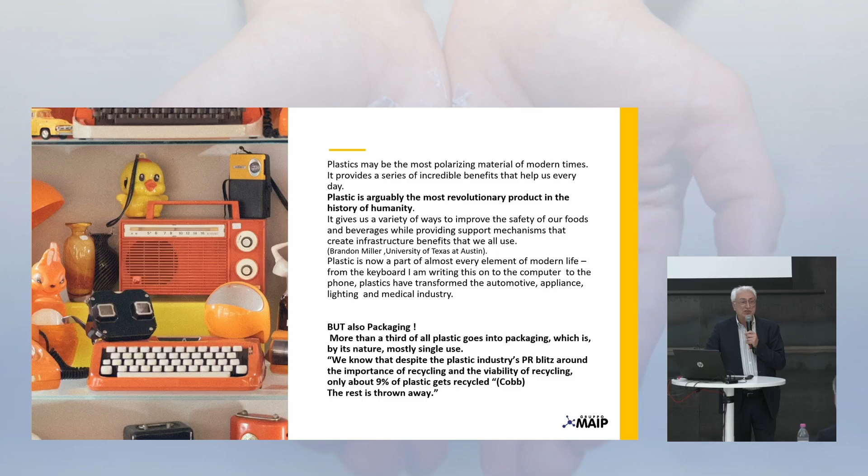Of course, we can recycle plastic, and Europe, and Italy especially, is very advanced in the recycling system. But for instance, in the US, only 9%, maximum 10% is recycled. The rest is going to landfill, creating pollution in a very huge area. Which is the problem of plastic? The durability. One of the most important advantages of plastic is that it's not easily destroyed. It's a durable material. This is a big advantage. It's not like metal that can be corroded.

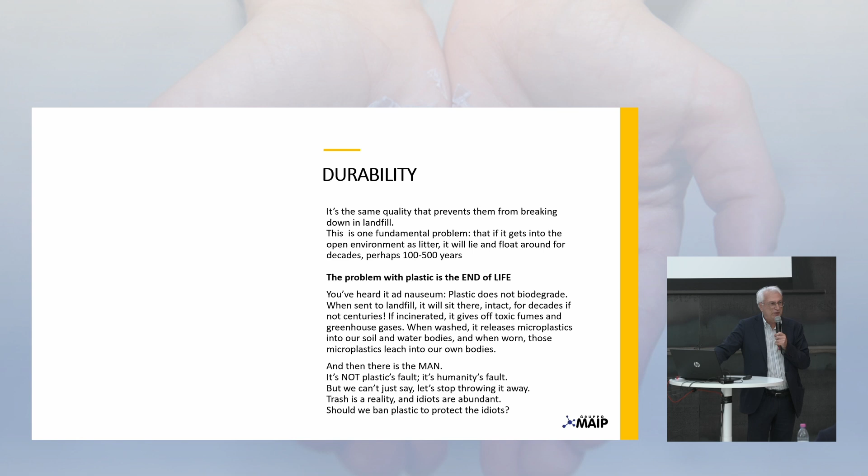But this advantage is also the problem at the end of life. We have a lot of problems, I repeat, with the end of life. So every day you have something against plastic. Plastic is not able to degrade. When sent to landfill, it creates a lot of pollution, and so on. And then there is also man. Man sometimes is an idiot, because many people throw away plastic components. So you find plastic littering on the beach, in the sea, everywhere. And this is really a problem, the littering.

But you have to imagine one point that is very important. If we decide to replace plastic with another material, in any case, we will do some hostile act against nature. Because, only to give you an example, the CO2 emissions would become 2.7 times more. It's an official number. So plastic is still an ecological material. But of course, we can't forget what we see every day. These are some pictures from the world. Plastic pollution everywhere, mostly in the sea, in the marine environment. This is the real situation.

Maybe everybody knows the problem of the plastic islands, the plastic gyres. But you have to imagine that the plastic that you see, an island more or less similar in extension to France, another island similar to Greenland, and so on, is only 1% of the plastic in the marine environment. 1%. There is 5% more on the beaches. But what is unbelievable, but is the reality, 94% is at the depth of the sea or in the ocean itself.

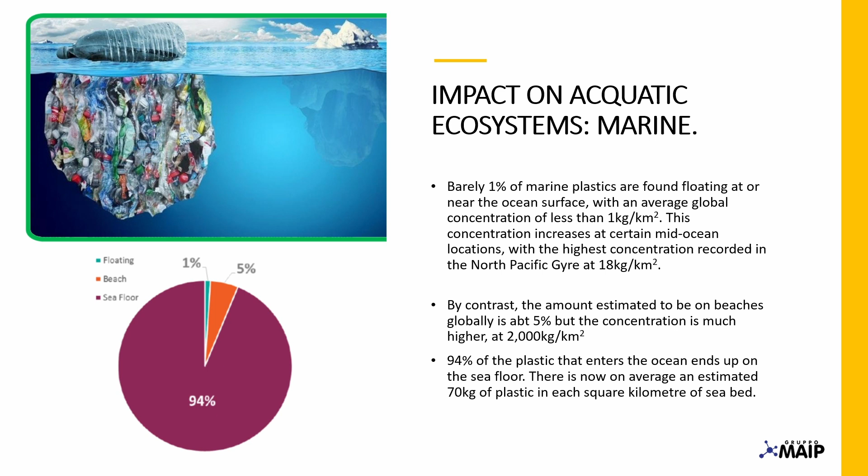I have not put a slide here, but imagine that some researchers of Newcastle University discovered last year a new type of shrimp, never discovered before, at a depth of 6,000 meters. The new shrimp was called Eurythenes plasticus. Why? Because in the stomach, the researchers found a piece of PET. The feedstock of the shrimp was PET. Imagine, at 6,000 meters.

Why? Because we have a lot of microplastic. We have primary and secondary microplastic. We have microplastic and also nanoplastic, which are more dangerous than microplastic. And all this type of material, sooner or later, is arriving to humans. You see the new food chain: plastic, the bottle, shrimps or birds, and at the end we eat plastic, microplastic. Which is true, but not everything is true. Now I give you an idea about some fake news that is coming on microplastic.

WWF, a famous world organization for animals, said some years ago that each person is eating every week an amount of microplastic equal to a credit card. So 5 grams per week, terrible. Imagine, everybody, you are eating 5 grams per week. And every kind of newspaper and magazine reported this news. So for everybody, we are eating a credit card every week. But it's not true. It's not true.

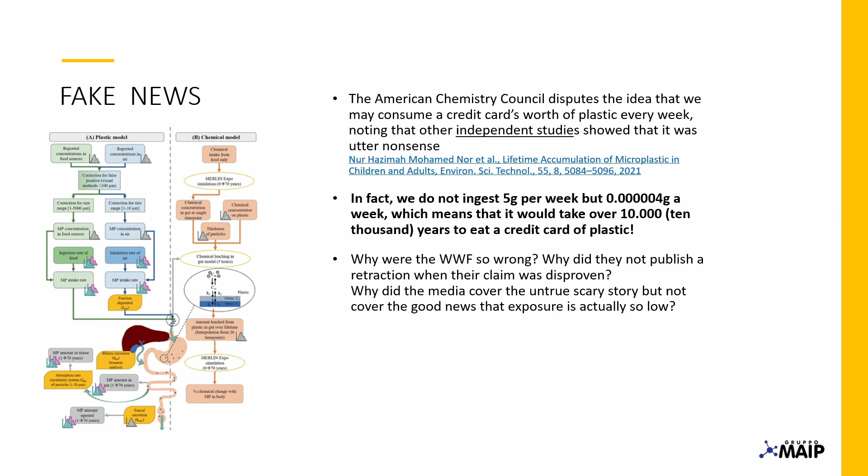Why? Money. The reason is money. Newspapers are able to sell more if the news are negative, not positive. And also the NGO or environmentalist organizations can receive money if the news are terrible, not if they are positive. Say no to plastic, ocean is full of plastic, and so on.

Do you want to see another fake news? Straw. It was reported by many magazines, Washington Post, National Geographic, Fox, everything, that in the US we are using 500 million single-use plastic straws per day. 500 million, imagine the number.

Terrible, terrible. So what is the reaction? We have to avoid the use of plastic straws. But where does this news come from? What has been the study behind this news? Now I give you the answer.

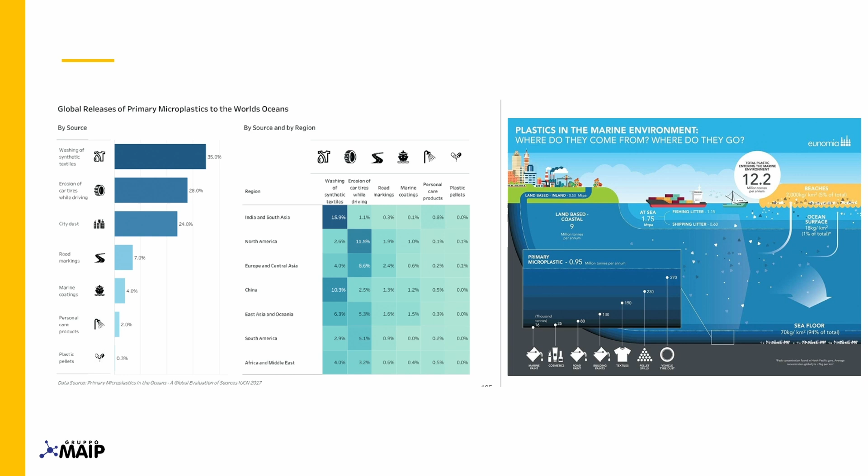We are speaking about a lot of microplastic. Imagine that every year in the sea, about 12 million tons of plastic arrive. Of this, about 1 million ton is primary microplastic, meaning intentionally added microplastic.

And one of the most terrible problems is the washing of polyester textile. Normal washing machines are not able to make good filtration for this. So it's normal to say that it's better to use a natural material, for instance cotton. Cotton is natural, it's not like plastic.

But we have always to give a complex view of everything. So the question could be, what is more friendly between cotton and polyester?

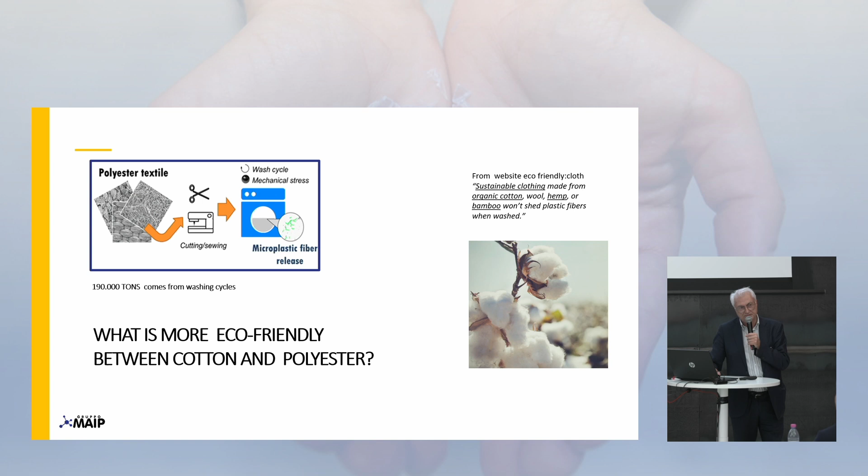I have to tell you one point more. What is the most important resource for our period? Water. We need water, and the ecosystem of water is collapsing. This year, I was on vacation in Uzbekistan, and personally I saw what is happening in the Aral Lake. There is no water. The biggest lake in the world is now without water. The boats are on the land, no water.

Turkey was a country with a lot of water in the past. Now they are starting to need to find water. And what is happening? A geopolitical war. Do you know where there is still some water? In Kurdistan. This is the real reason Turkey is trying to take a lot of land from Kurdistan - for water, not for petrol, for water.

So water is precious. And I come back now to the question, polyester or cotton? To produce 1 kilo of polyester, you need 20 liters of water. If you need to produce 1 kilo of cotton, you need 11,000 liters of water - 550 times more. You need a lot of water. You are destroying the country if you take the water for producing cotton in a natural way.

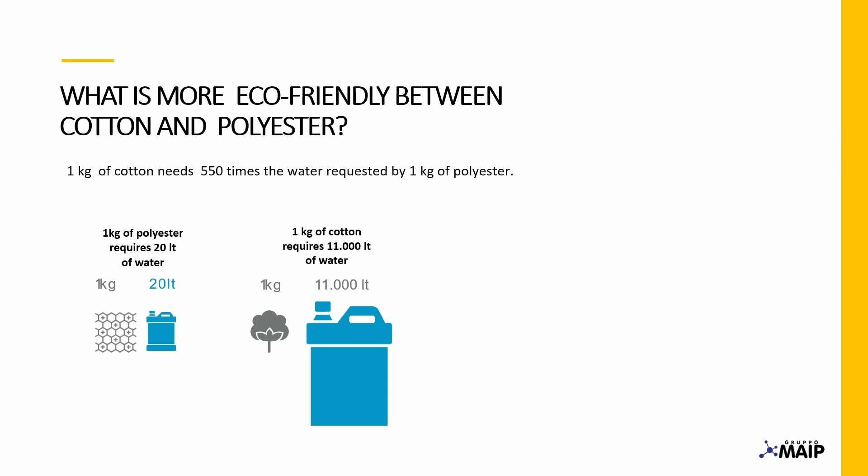If you take a cotton t-shirt, to produce one single t-shirt you need 2,700 liters of water. So be careful to say that cotton is better than polyester.

Another fake, Greenpeace, very famous. Greenpeace, to tell the truth, lost a lot of its credibility because the founder of Greenpeace said, despite my best effort, the movement abandoned science and logic somewhere in the past. Now it's not scientific at all.

They published a book, Biodegradable Plastic on the Sea. In the book was written that bioplastic does not degrade in marine water. Officially. Again, this is fake news. It is not true. At least there is one material, one biopolymer, that is able to degrade in the water.

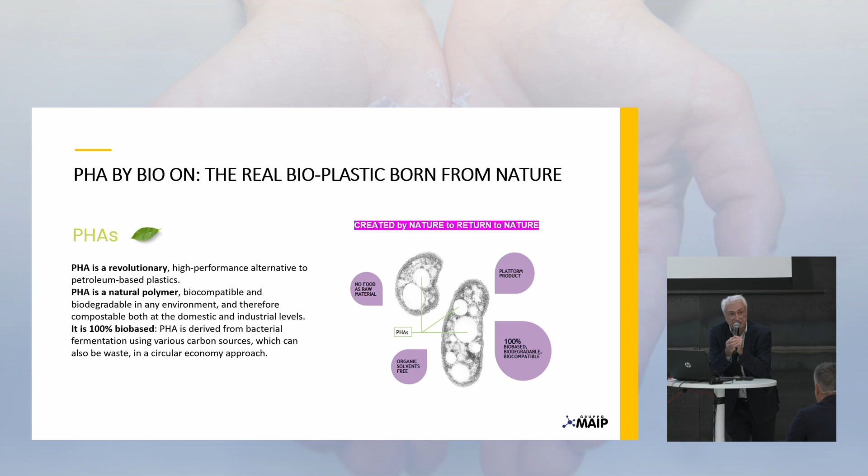It is biodegradable in any ambient, in any environment. And this is written by something that is studied by nova-Institute in Germany.

But of course, we face microplastic of any kind, also in agriculture, you see some parts. But we can produce this part now in PHA. A PHA, if it falls down on the land, becomes a fertilizer. It doesn't become a microplastic. It becomes a fertilizer.

So, plastic is not a devil. It's really a big invention, an important invention of mankind.

But check the news with a scientific approach. Not everything is true.

PHA is an angel that could save a problem. Where is my conflict of interest? I am half devil and half angel. So interiorly, I have a big conflict of interest. But at the end, what is my dream? My dream is to combine nature and future. Thanks for your attention.

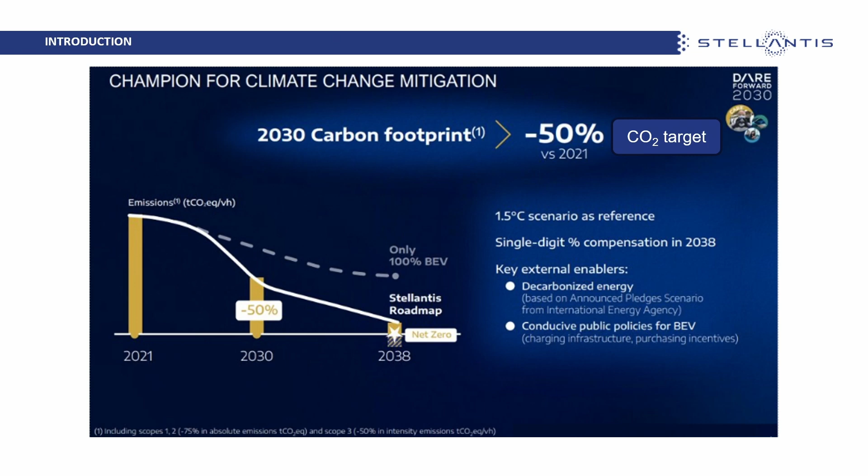And, okay, thank you. What is interesting in the graph on the slide is that there is a dotted line. The dotted line represents the path we will have if we only electrify our cars. You can clearly see that it will not be enough to decrease our CO2 emissions and meet our targets.

This means that we'll have to work not only on electrification, but also on the materials and processes used to realize the components used in our vehicles.

So this is the other main target I mentioned before - more a constraint. This is the draft of the end-of-life regulation. At the moment it's under discussion, but currently you can read that in the future, probably 2041-2042, we will have a target of 25% of the plastic in our vehicles being recycled and post-consumer recycled. And 25% of that 25% should come from end of life.

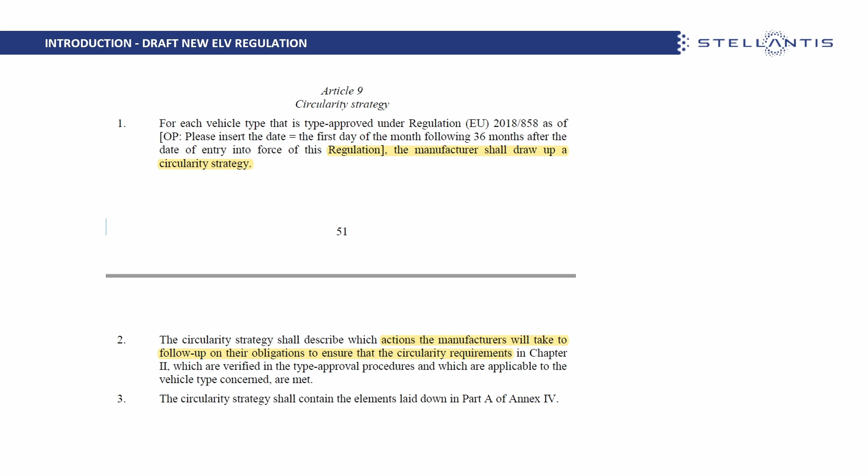Okay, so it's a huge constraint. Associated with this, there is also an indication that it will be necessary to create a circularity strategy, and I will come back to this later. There is also a list of parts that will need to be dismounted from vehicles at the end of life. This is also impacting, because if you look at the list, there are for example the dashboards, which are not so easy to dismount because they are inside the vehicle compartment.

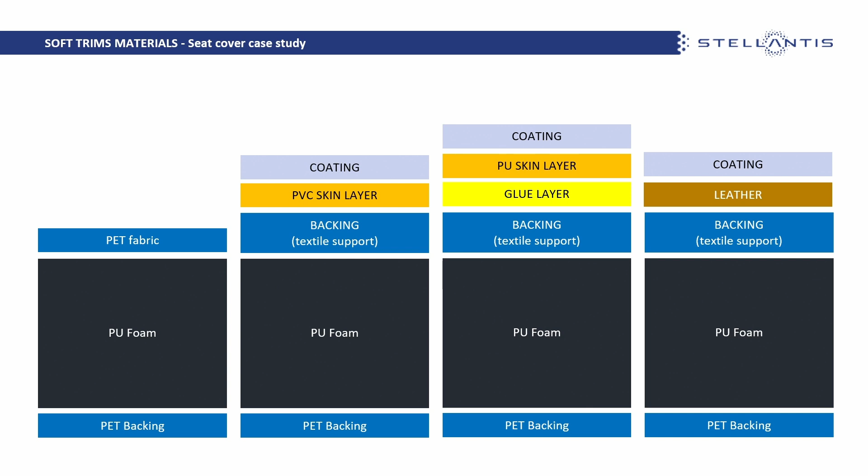We can see this clearly looking at this other slide related to the structure of the material used for seat covers. In this case we have four examples: the first related mainly to fabrics structure, then we have the PVC structure for seat covers, another structure using a polyurethane coating or skin, and leather. In all four cases, we have a polyurethane foam and a backing made of polyester.

Also in this case, we can see that the structures are very heterogeneous. If I have to recycle this kind of material, it will be quite impossible. So the main way to reuse them will be to burn them to obtain energy.

What can we do? One possible approach that not only us but also our competitors are looking for is the monomaterial approach—to substitute the layer, in the example here the polyurethane layer that is between the two polyester layers, with a non-woven polyester.

In this way, we will have the aesthetic layer made of polyester, the layer in between—that was before a polyurethane foam—made of non-woven polyester, and the backing made again of polyester. This, from the point of view of recyclability, is a very good option.

From the point of view of a designer, it's a constraint, because this will mean the possibility to change and propose to the customer something different is limited. For example, if we look at Stellantis, we have 15 brands now, so to change from one brand to another will be really difficult.

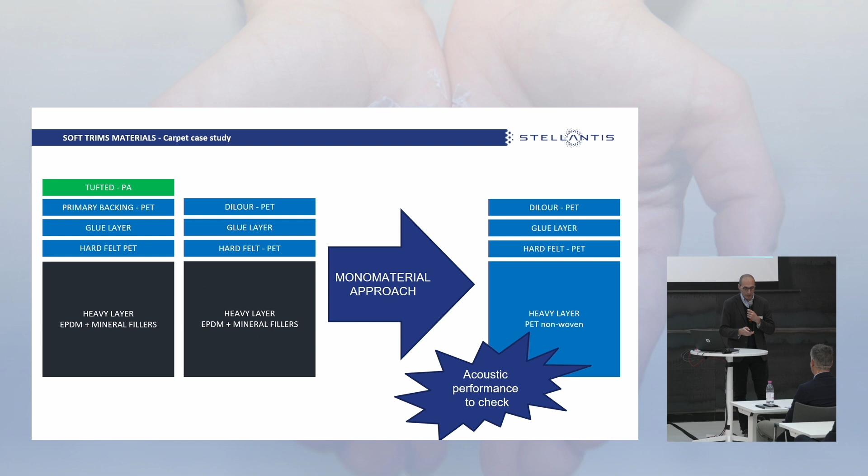So, jumping to the plastic world, first of all I would like to say a few words about our new approach with the creation of Stellantis. We defined some new codes to codify the plastic materials.

These codes are called GPC, the Global Plastic Callout, a system of codes. To this code are associated specific chemical, mechanical, and physical properties, and to each of these codes we associate several commercial materials. In the example you can see here, we have a code associated to a thermoplastic olefin. You can see that in the code we have the indication of the filler, the quantity of the filler, and some mechanical performances associated to that specific code.

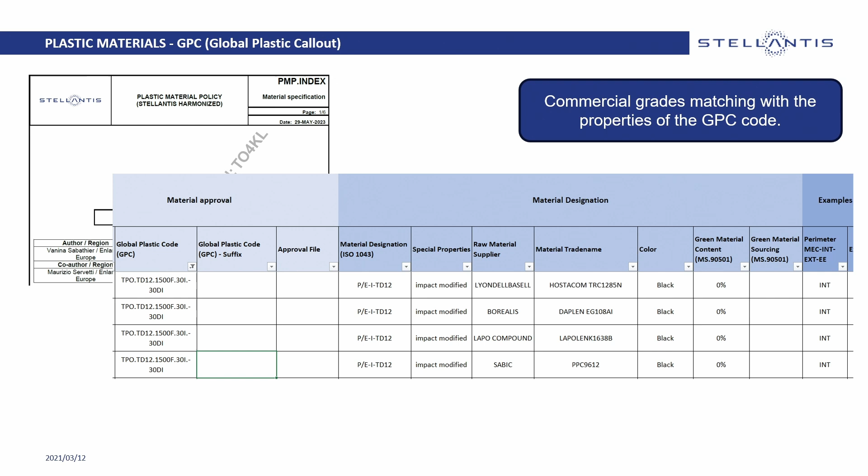So the chemical, physical, and mechanical properties that we will have to fulfill to codify a commercial grade with the code we saw before. The last document associated to this new policy is the PMP index, a standard with inside the list of all the commercial grades approved in the Stellantis world, to which the GPC codes are associated.

Moving to the green strategy, the main focus of Stellantis currently is mechanical recycling, because at the moment it's the most diffused and also the cheapest technology available. The other possibility we are evaluating, but not yet implementing much, is biofeedstock and chemical recycling, to which is associated the mass balance approach.

These kinds of materials are not so used for several reasons. For sure we have the cost. Another reason is that this mass balance approach is not so well seen, also because the regulation currently is not well detailing whether it will be accepted or not. For example, in evaluating the 25% end-of-life regulation we will be obliged to respect in the future, the hope is that the regulation will evolve so it will be possible to understand well if this kind of technology can be used to reach the target the European Commission will give us.

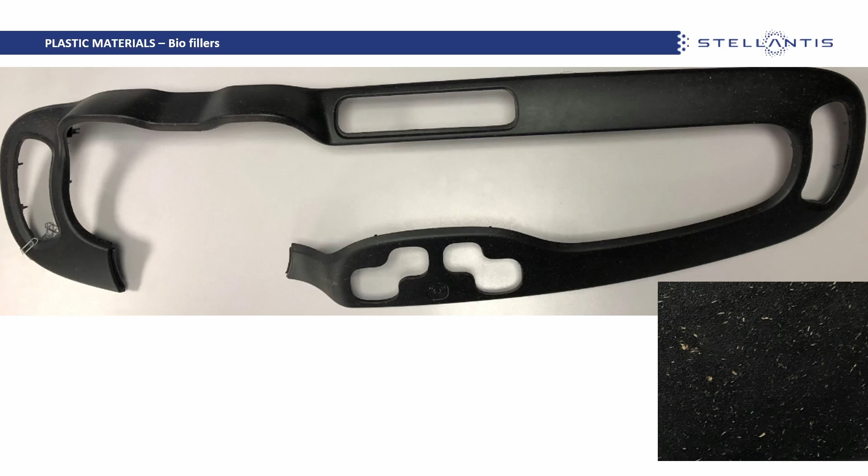Then we have an example that we made with MIPE, who is here with us today. This is another potential approach to sustainability in plastic, the application of biofiller inside the plastic. In this case, we have the application of wood fibers. This is an instrument panel fascia that has been used in a Panda model. A specific event was dedicated to this model, and I can say it has not been the only activity we did with biofiller, but I want to explain the way we currently see this filler.

From the point of view of CO2 emissions, the results are very good. From the point of view of mechanical properties, we saw performances decreasing, so not at the level of the standard filler. From the point of view of processability, they bring some constraints, because we have to decrease, for example, the temperature of extrusion. From the point of view of chemical resistance and aging, we have the same properties as the standard technology. So we are interested, and we are using them as I showed you in the example, but obviously we cannot use them everywhere, okay?

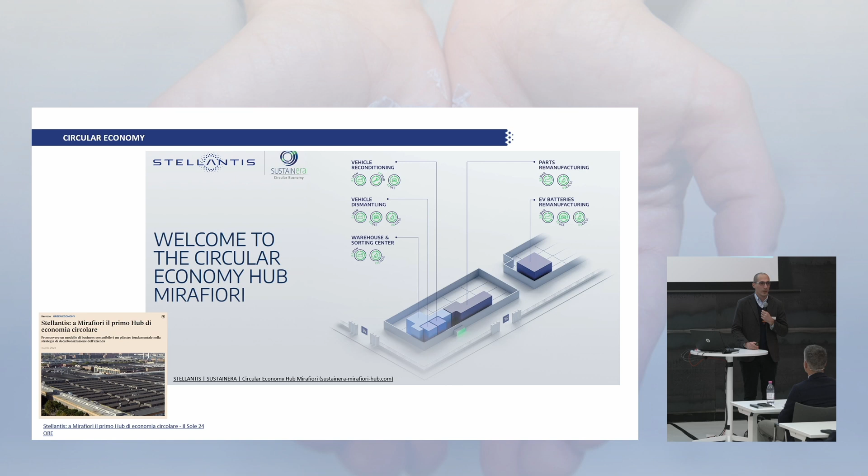And the last ongoing activity is the remanufacturing of end-of-life batteries. Obviously, in this case, the numbers are not so huge. Now I will show you a short video about the Mirafiori Hub.

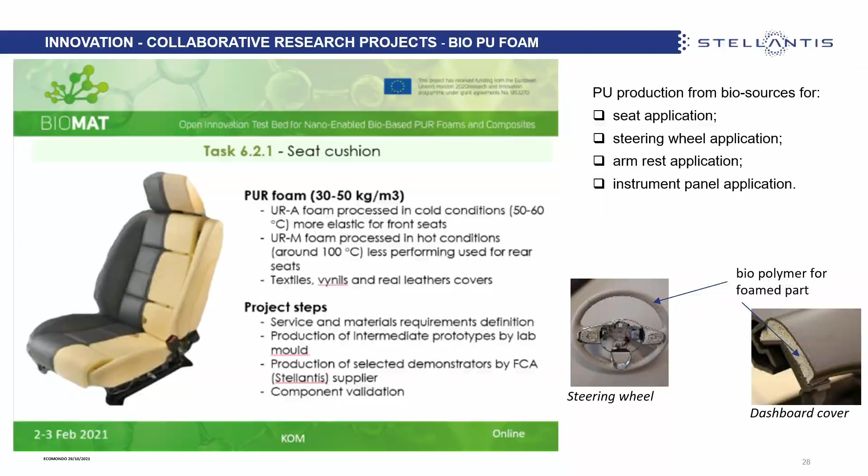We are also working on a polyurethane biofoam, in a project called Biomat. In this case, we would like to develop a polyurethane foam for seat cushioning application and the steering wheel. We have another collaborative project called MyFi, which aims to develop a skin based on fungal fermentation, with the goal of substituting leather for interior applications.

We have another project called Life Green Vulcan, which focuses on recycling tires at the end of life with a specific devulcanization process. And another project called Viable, whose scope is to try to use lignin as an alternative to bisphenol A in epoxy resin.

Then we have Eolo Hubs, in which we would like to recycle material coming from turbine blades at the end of their life. And then the last one I will touch is Like Beyond, in which we are working on several activities to make our vehicles more green.

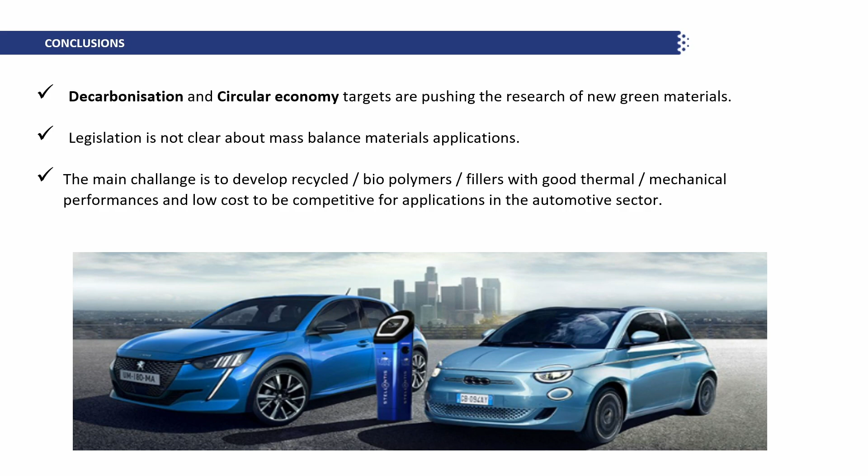So I'm going to the conclusion. As I say, decarbonization and the circular economy are pushing us to research new green materials. We would like to have also legislation more clear on which kind of technology are allowed. And as you can imagine, we have to develop recycled biopolymers and fillers with good performances, but it should also be at an acceptable cost, if possible at a low cost, because as you know, the automotive sector is very, very competitive, especially in this period.

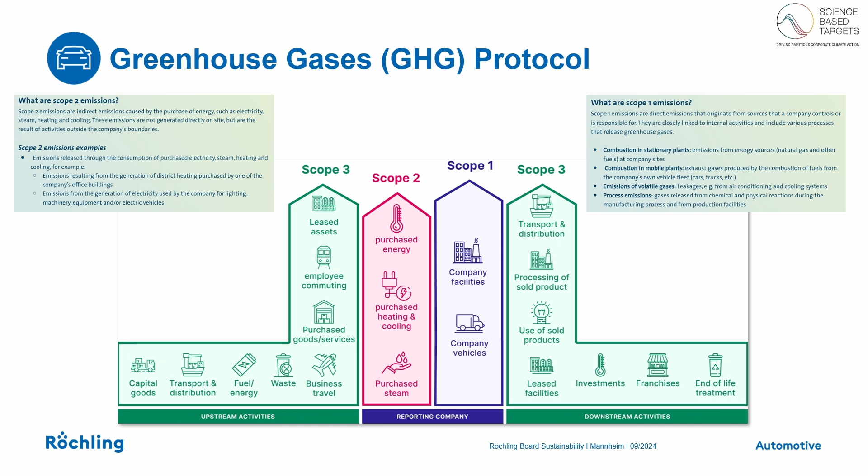Product, people, planet: these are some of our KPIs that I was following. As I said, 2030, 80%, following the SBTi program, so science-based targets, and 100%, so net zero in 2040, for scope 1 and scope 2. As you can see, scope 1 and 2 and scope 3. Scope 3 is something that we cannot directly control because we have upstream and downstream activities. But for scope 1 and 2, as Röchling, we can proceed with our activities and with our projects.

Today we will talk about products and plastic. In Röchling we started 10 years ago to talk about biomaterial and recycled material. We have two families of material group. One of these is Reloop, so all the material starting from recycled solution, either post-industrial or post-consumer.

Today, in 2024, our global production uses 30% of recycled material. In some cases, we have some components totally made in 100% recycled solution. And our goal in 2028 is to achieve 60% overall of our production with recycled material when and where customers require this. And now it's a pleasure to hand over to you, Francesco, to explain the LCA process.

So, as introduced by Andrea before, I'm the one in Röchling currently leading the LCA project. So I will give you a short introduction of what this project means. In general, according to our strategy, we want to evaluate the environmental impact of our products in order to reduce it. But before reducing, we have to evaluate. The methodology we decided to use to evaluate the environmental impact is the life cycle assessment.

As many of you probably know, the life cycle assessment is a methodology that allows us to evaluate the environmental impact through the whole product life cycle, so from raw material extraction to the end of life and disposal. So we, as Röchling, want to start evaluating our products. It's a project that we started almost 2 years ago. And the target we had at the beginning is a part of the life cycle.

It means we want to evaluate at first the carbon footprint, the GWP. This will be the first step we take, and afterwards, step by step, we will move to an evaluation of all the other impact categories. The GWP actually means that we measure the heat absorbed by the greenhouse gases as a multiple of the heat absorbed by carbon dioxide.

As said before by Alessandro, we are a global company, so we have to think globally and have a global approach. That's why we decided to create a general model. Why? Because our facilities work more or less in the same way. We produce the same type of parts, so we can produce with the same approach. That means especially a primary manufacturing and then some subsequent operations. In this primary manufacturing, we use raw material, and then we may or may not mount subcomponents, outsourced parts, on our products. That's why we decided to identify the boundary of our analysis.

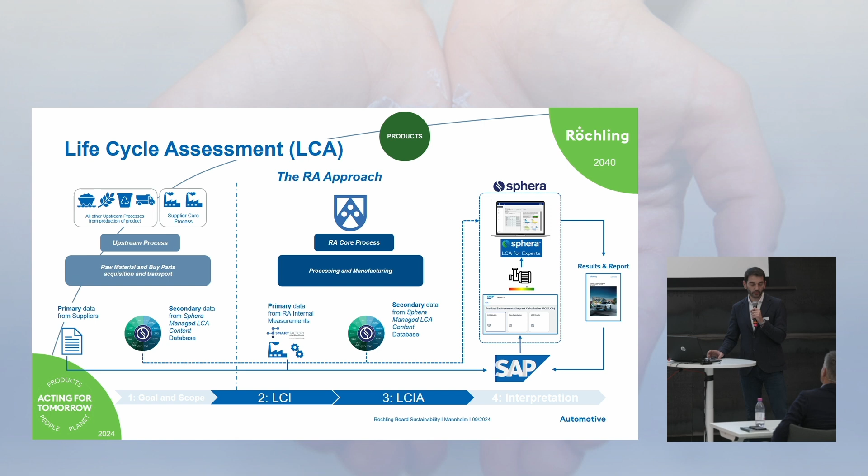Hello. Thank you, Francesco. My name is Matteo Traina, and the last part will be dedicated to what is one of the key pillars of our company, meaning that we are plastic guys. We develop product, meaning that the very first thing that we know we need to manage is to be aware about the material we use.

In particular, if we try to pursue solutions to get sustainability, it is also to select the right material. This applies in the specific case to know exactly what is available on the market in terms of solutions to get sustainability. I think recycled material is the very first thing that you can have in mind. But since we are all people working on plastic, we are conscious that there are also other solutions.

With these solutions in mind, the very important thing is also to understand that each solution has a different feature. Unfortunately, none of these is the perfect solution which is able to put everything together: low cost, high performance, high sustainability footprint. Any of the solutions that we have on the market is affected by some drawback.

If you don't mind spending, you have the perfect solution because you have the biofeedstock-based material using mass balance. On the other side, it means that everything is costing more. If you have recycling, you don't have the perfect technical solution because you are suffering some reduction of the performance.

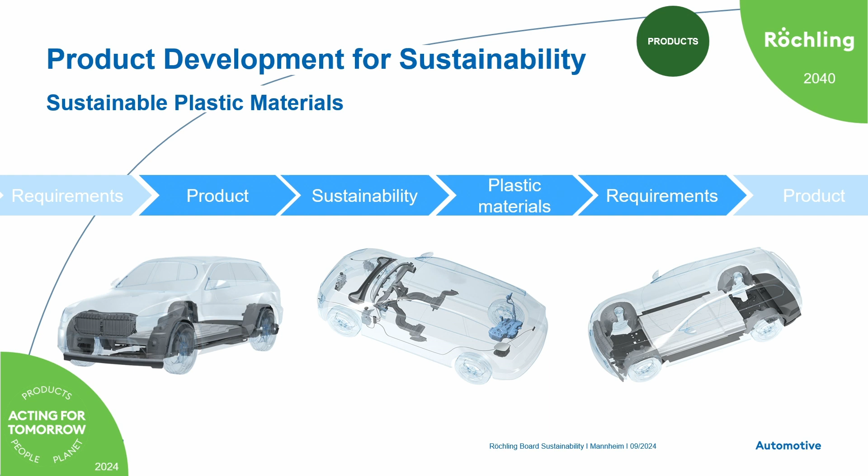From the practical point of view, this means that the development should be oriented to take into account exactly what is the requirement related to the part that you have to manage, and look back to your book to understand what the plastic can do, put the requirements all together and find the right solution. This integrated approach brings different comments about possible products that we can consider. Here, I had a short view about the products that Röchling is managing. But let me say that for any application, it works in a similar way.

For example, for underbody, the part on my right, you can see that the critical item is to have material able to work properly in the process, meaning to fill the mold during injection molding, and a good resistance to low temperature. This means that the possible solution is recycling, mechanically recycled material. On the other side, you have to take into account to select a material which is not suffering in terms of impact resistance reduction.

If you consider a material that you use for climate cabin air duct, over there, the mechanical requirements are relatively poor in comparison to other applications. On the other side, you have a particular requirement that sometimes people don't think about. This is that contamination can bring pollution to the moisture, which is causing an odor which is not appreciated by people. In this way, you could select a recycled material, but you have to put a lot of care to take the right one. All the products apply in a similar way in this analysis.

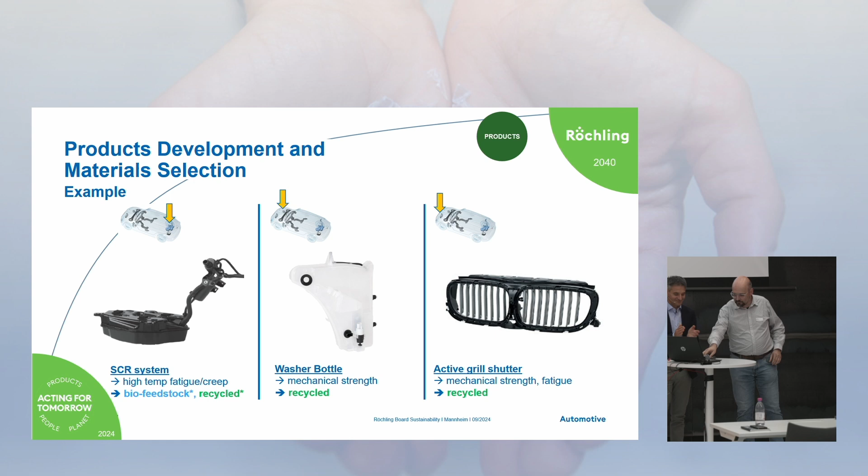I ended with my part, so I give back the microphone, the stage to Andrea. Thank you. I think we save a little bit sometimes. I appreciate it. So for the question, I think also we can wait later. Okay, thank you. Thank you again.

So I don't want to introduce company MAIP. You already heard something about that before. But I also would like to introduce Gianluca Pizzati. Gianluca is an expert with more than 20 years experience in high-tech polymer compounding with focus in the automotive field. Along his experience, he dealt with topics related to material development and also for specific applications for the components. He's working now as a CEO of MAIP Compounding, and I really thank Gianluca for a very interesting presentation.

And too long description. It means that I'm too old. You know we have to make faster.

Okay. Thank you. Okay, so a few minutes just to introduce a little bit MAIP. First 4 or 5 slides are dedicated to that, but Eligio already told about that. Anyway, it's quite an old company, starting activities in 1960, so a long time ago. What is important to underline is that it started the business as a distributor. Today, the main activities are in the compounding and in the polymerization. Compounding of several polymers, we will see later on the portfolio. And of course, what is more important, even the production, the polymerization of the PHA.

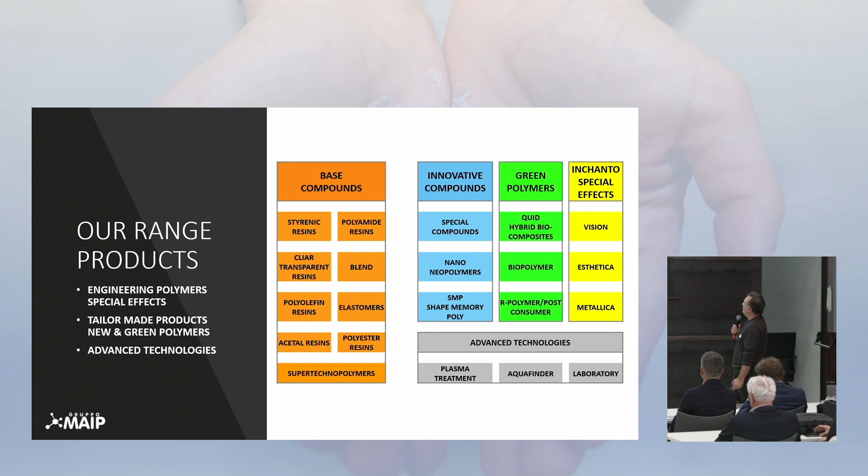We have the green area where we have traditional recycling, mechanical recycling products. We have chemical recycling products and biopolymer from our production, PHA. And another point which is extremely interesting for the automotive field are the special effects. You see on the table here a part which is realized with a very special effect with some sparkles. This is something which is very interesting to get rid of painting and grant personalization to the car.

But in the future, we will have recycling as the main production way to produce plastics. That will include the mechanical recycling and the chemical recycling, which probably in terms of dimension will be the easiest and the better solution to recycle the different plastic materials without separation. We will have a relevant amount of bio-based polymers, which can include PHA, PLA, and other products which are already existing. And we will have a relevant part that today is almost zero, which is the production of polymer starting from CO2. So basically, we will take CO2 from the atmosphere to produce monomers.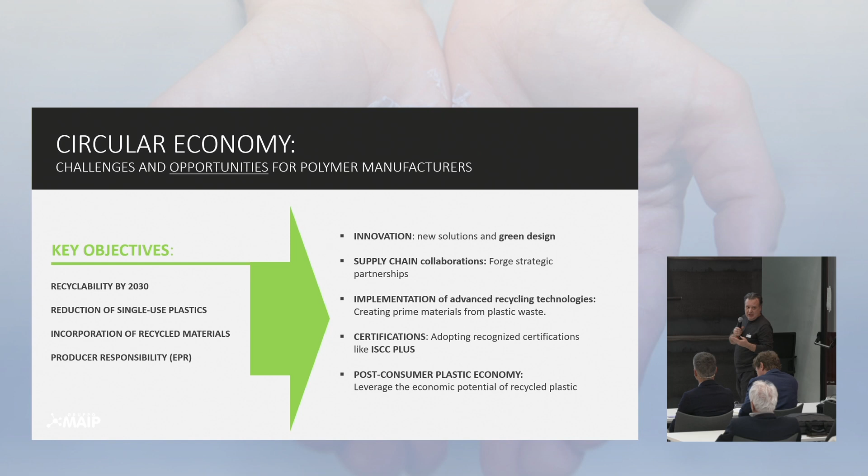That's very important when it comes to mechanical recycling, like, for example, polyamide coming from textile. Normally you have a certain amount of titanium dioxide in it, which means you have a technical performance, especially tensile strength, which is lower. The solution is to not use this grade for high-demanding materials or parts, but another solution is simply to increase the thickness a little bit.

So design is extremely important in combination with the material. Another very important point will be the supply chain, because today, when it comes to mechanical recycling — we will see later on some slides — we are in reality recycling a small amount of polymers.

The majority of the plastic is wasted, or used and burned to produce energy. And that's a problem if we really want to arrive at a real circular economy. So new technology, of course, will be key, as well as certification and so on.

So from an LCA point of view, instead, what we need to underline is that today we miss information, or at least — let's take an example.

We are producing polyamide and we have two suppliers: one is European and the other one is Asian, okay? Which is normal, because we need to have sources from different parts of the world to minimize the risk of a break in the supply chain.

The thing is that in our final compound, we can have a difference in terms of LCA which can be from 30% to 40%, because the production in China is a lot higher in terms of LCA value in comparison to the European one. So which value do we have to give to Stellantis if they ask us, or to a customer if they ask us? One of the two. We need this information.

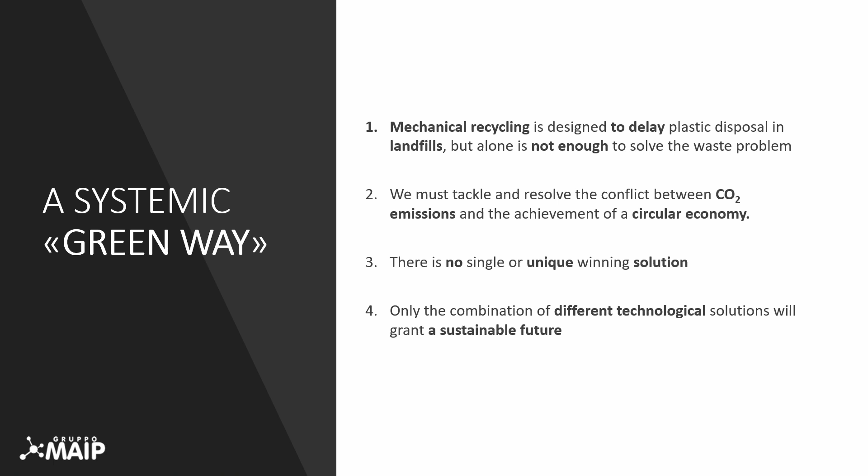So we definitely need mechanical recycling, because it's the cheapest and easiest way. It's traditional, since we've been producing mechanical recycling compounds for 30 years. And of course, that will always be the best solution from an LCA point of view and from a circular economy point of view. It's the only way to produce green material while keeping both needs in mind: we must solve the problem of CO2 emissions and the circular economy.

In my opinion, the future is definitely more about looking at circular economy than simply at CO2 emissions, which is a concept easy to sell to the customer but sometimes not the best one if we're looking out for the environment. Of course, there isn't a single unique winning solution, and we will need different technological approaches in order to be able to guarantee a sustainable future.

So we will need a concept or solution that involves recycling, carbon capture and the utilization of CO2 as a monomer, as well as biomass or renewable sources.

That's a description trying to describe the problem of recycling. Today we are collecting, and here we see some examples of material, just a few materials. Depending on the collection, the feedstock, and the grade of separation and contamination, we can imagine using this material in different processes.

Here you see something like glycolysis, which is an easier process, less demanding in terms of energy compared to traditional pyrolysis, but you need to use basically polyester or even just PET. Methanolysis can be another solution, another chemical technology, but it's okay only if you have a polyester feedstock. If you have contamination, then you have a problem.

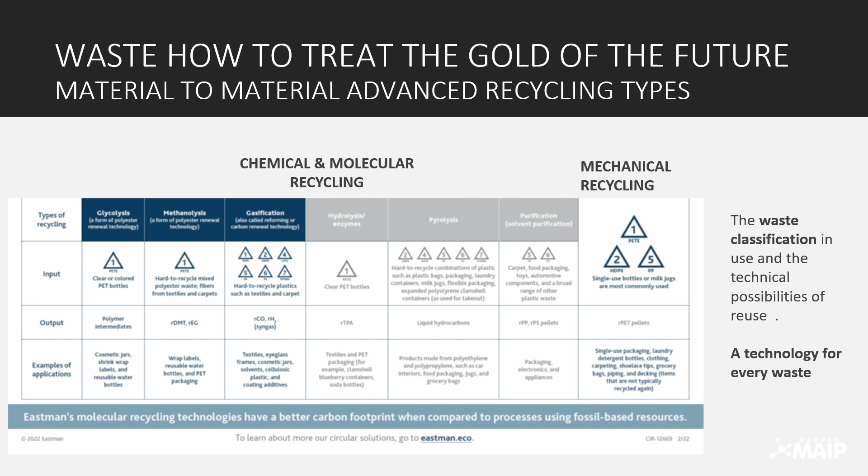And of course, there's traditional pyrolysis, which from an industrial point of view is the easiest way to collect material, because you can get all the material together, plus the organic fraction, and simply burn these scraps to come back to an oil which is no longer coming from a non-renewable source, but we can consider this oil as coming from a renewable source.

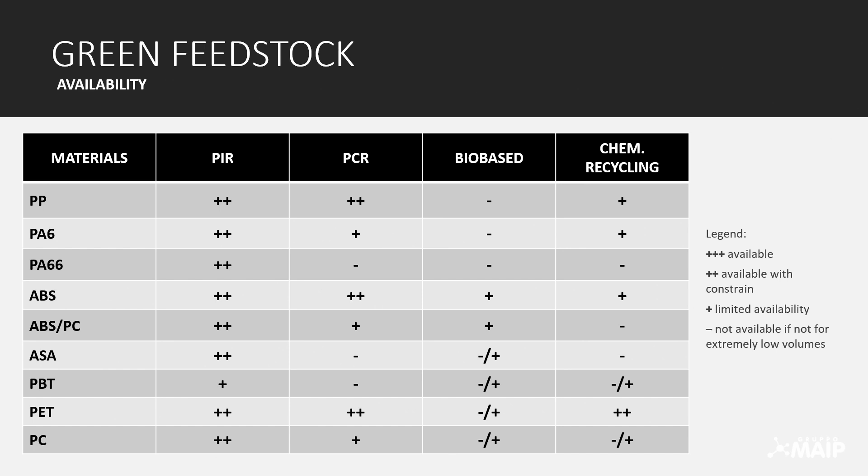Here you see, taking into account that we're talking about something which is changing day by day, but still this is a picture of the situation today: what you can have post-industrial, what you can have post-consumption, what you can have bio-based, what you can have from chemical recycling. For PP, you can even have a small amount bio-based, but it's not relevant yet. In the future it will grow.

Polyamide 6, same story. You can have quite a good amount of post-industrial material, but almost nothing when it comes to post-consumption. There's just a little polyamide 6 maybe coming from fishing nets, but there isn't real collection of post-consumption for polyamide 6. So we can maybe make a business case around post-consumption, but if you look at big volumes today, we have to consider post-industrial at the same level as post-consumption, otherwise we'll have a big problem satisfying the requirements.

There are other materials for which you have almost all solutions, like ABS, where there are already bio-based or partially bio-based solutions, and chemical recycling too. The same is true for polyester. The polyester world is one of the easiest in terms of chemistry, where you can have all solutions: post-industrial, post-consumption, bio-based, and chemical recycling.

This is a fast description trying to show how much material coming from mechanical recycling I can use to grant properties similar to prime material. So in some cases, like polyamide, the amount of recycling you can use if you want properties close to prime is not so big, because of the titanium dioxide I was mentioning.

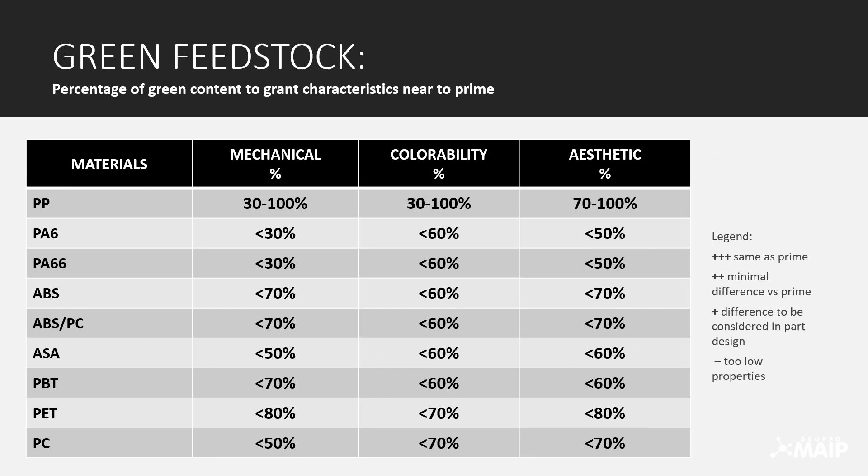So again, there are different ways. Recycling is king. We have chemical recycling, we have mechanical recycling. We can have hybrid composites, which are based on recycled material plus some natural fiber coming from a renewable source. We have biopolymers, and under development, because today there are not many examples, CO2-based materials.

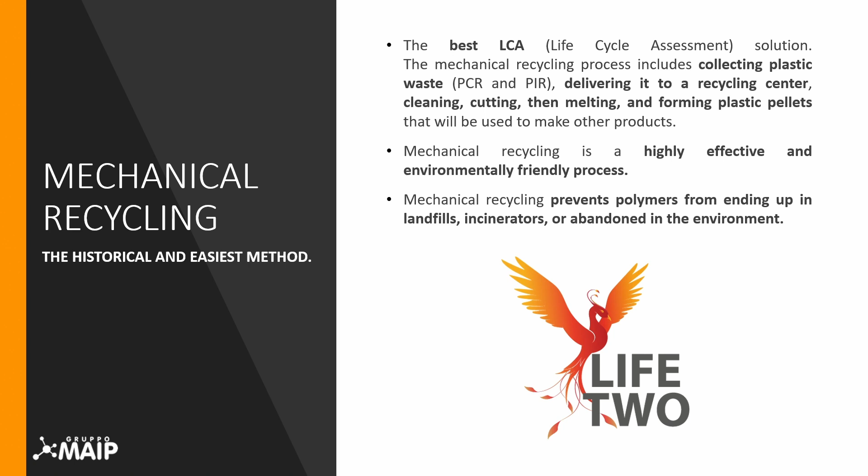Mechanical recycling, as mentioned, has big limitations because of the mechanical properties and the feedstock, which cannot be controlled 100%. So the key of a good mechanical recycling process is the feedstock, the quality of scrap. You have degradation limits, which is the number of recycling cycles you can have with the material. So you have a strong limitation in case of transparent products, which is almost impossible to realize if not accepting black spots, with a big presence of black spots, and maybe even yellow index variation.

Mechanical properties, of course, have a strong limitation. So basically, to succeed using mechanical recycling, because the volumes are limited, you need to dedicate in partnership the source and the products, the amount, in agreement with the customer and the application. So you need to grant the customer this, and this is a function of your supply chain.

You need to design the part to use this material. That's a key, because then we cannot complain if the properties are not the same as prime. We know it from the beginning. And the key is definitely the mix between post-consumer and post-industrial material, which is different material by material depending on what is possible to receive from the market.

Feedstock control is the real value of every company. Today there's a big mess, but I hope in the future it will be more clear. Everybody is claiming to have green material, but what's important, in my opinion, is to have certification. Today there is not one commonly agreed certification for Europe, but there are third parties like CSC, CSI, or TUV, which are granting the real amount and the provenance of the material, whether it's PCR or PIR. That's a key, and that's definitely our way to go green.

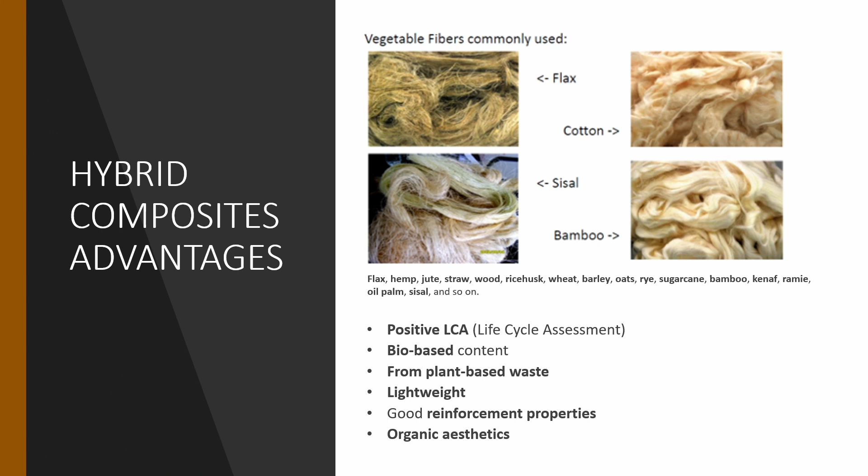Another way to reduce the LCA value is to use a traditional polymer, in this case just polypropylene, with some natural fiber. Here you see an example which is in serial production.

Chemical recycling is another way, which has its own problem. Once again, supply chain and big investment are needed. The advantage is that you have a quality as good as prime. The supply chain is easier compared to mechanical recycling, because you do not need to separate as much. You can take, in many cases depending on the process, different types of scraps altogether. It's in full respect of circularity, but today, unfortunately, it has a higher LCA for the final products because of the energy consumption, which is higher.

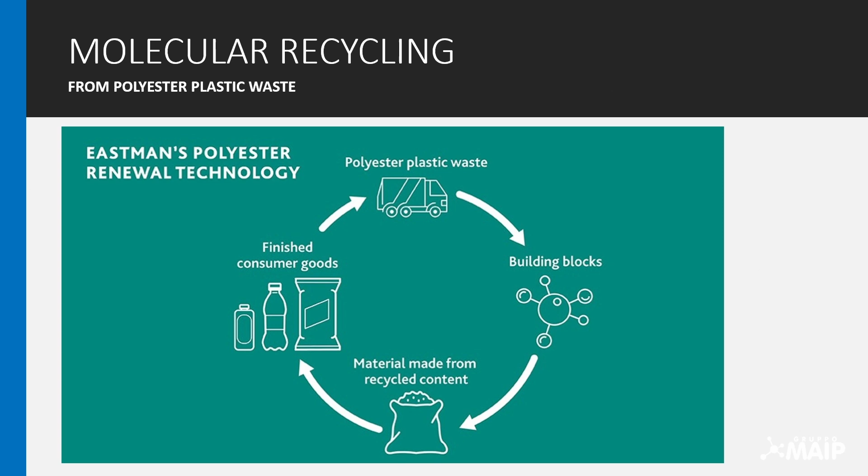So you see what we can have today already from chemical recycling. We have some serial production of this product too. It's mainly copolyester, some polyamides in limited quantity, ABS as well, and polyolefin as well, not in big quantity. We have some solutions based today on Eastman polyester renewal technology, which mainly recycles polyester, material which has the same or similar properties to polycarbonate and polycarbonate ABS. Unfortunately, not for the same cost, I have to say.

I was mentioning before how to reduce the LCA using prime grades and adding something able to reduce the LCA value. This is what we call Cycle Zero, which is basically an additive you can consider as a mineral filler, even if it's not mineral. Basically it's an additive that you add with a negative LCA value. So the more you add this additive to your polypropylene, for example, the more you reduce the LCA of the final compound.

You can consider this material as an alternative to PP talc, for example, with some limitations like odor, because here we are talking about scraps coming from city waste.

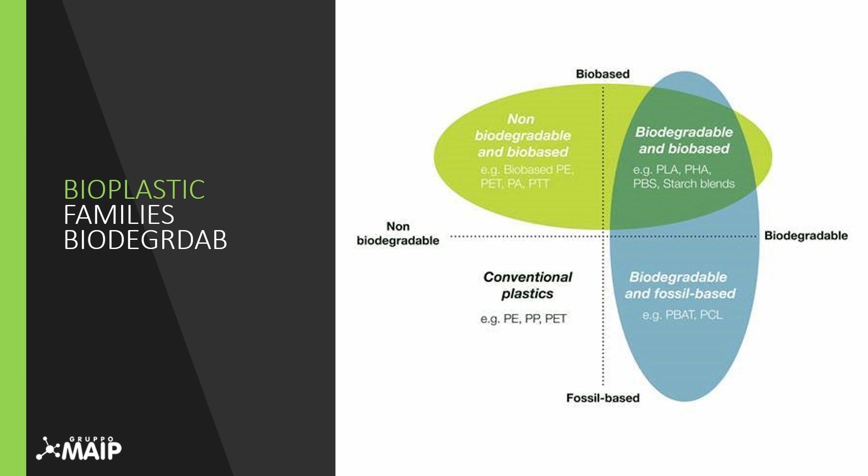So even if the material is partially pyrolyzed, you still have some organic remaining presence. Bioplastic, it has been mentioned. I think that Eligio already mentioned our products, so I will pass through quite fast. There are several materials which can be realized from renewable source. You know the difference, I think, between biodegradable and, let me say, fossil-based and bio-based. So sometimes there is confusion in the market and among the consumers, okay? Bio is used for everything. Mechanical recycling, bio-content, biodegradability, that's not true. We need to clarify this point.

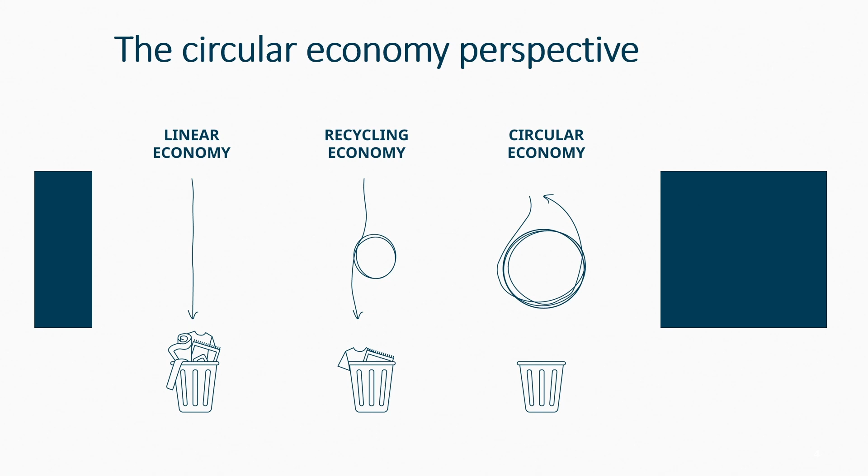Good afternoon, everybody. I'm Gabriele Baratella. I've been working in Aquafil, Arco, where the headquarters are based, since 1999. Aquafil Group is a manufacturer of nylon 6 fibers and polymers. And we are a pioneer in circular economy and in recyclable products because our flagship is Econyl. Econyl is recycled nylon 6. And I want to show you in this short presentation, in the time that I have at my disposal, how we use this recycled polymer, chemically recycled nylon 6, to develop together with our customers the concept of circular economy for their products.

So here you have a scheme of what is the linear economy, so from cradle to waste. A recycling economy, which means basically reusing the polymer or the product as much as possible, but something will anyway go into incineration, landfilling, or whatever. And circular economy, whose scope is obviously to recycle every possible component of this product infinitely. So Econyl. Econyl is a chemically recycled nylon 6. I don't want to go deeper into details because Gianluca has already explained very well the different possibilities in terms of recycling.

What I wanted to just highlight is that this type of polymer is, as said, a chemically recycled one. It's made using nylon 6 waste that we collect all over the world, both post-industrial and post-consumer waste. For example, fishing nets, fabric scraps, or carpets. Why carpets? Because our major sector of application is the flooring industry, both for automotive and for other applications like offices, heavy duty, residential, hotels, and so on. And so when we started with the chemical recycling of nylon 6, the first idea was let's try to have back what our customers are buying from us, and so the carpets.

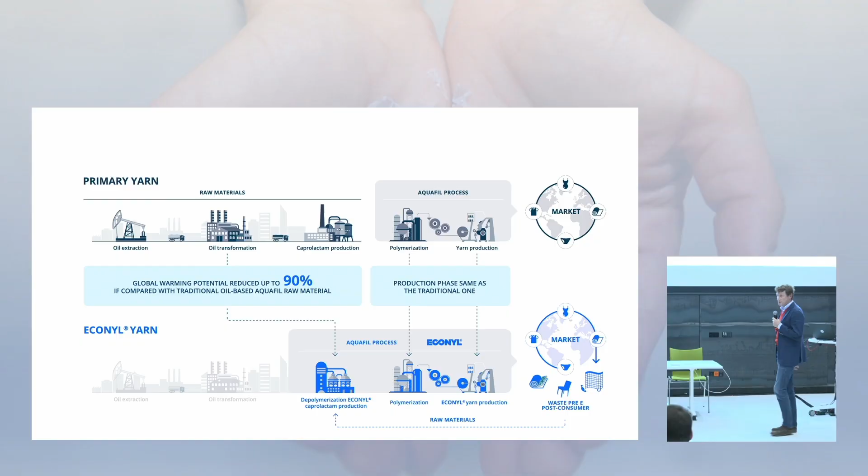In the case of Econyl, we recover the nylon 6 waste directly from the market. We go into a chemical depolymerization of nylon 6, which from the chemical engineering point of view is catalyzed hydrolysis, with a following step of purification based on distillation, like a grappa. So we remove the top, the bottom, just taking the core and removing in this case all the contaminants.

Also because one of the biggest advantages of the chemical depolymerization of nylon 6 is that it's happening in a gaseous phase. This means that all the contaminants that are inside, like pigments, stabilizers, simply fall by gravity. You don't need real filtering like, for example, for the chemical recycling of PET, which happens in a liquid phase, so a part must always be filtered, and this is obviously more difficult.

The results of Econyl, which are then certified through an LCA system, resulting in an EPD, an environmental product declaration, can be seen here. We have up to a 90% reduction of the global warming potential and up to 65% reduction of the primary energy demand.

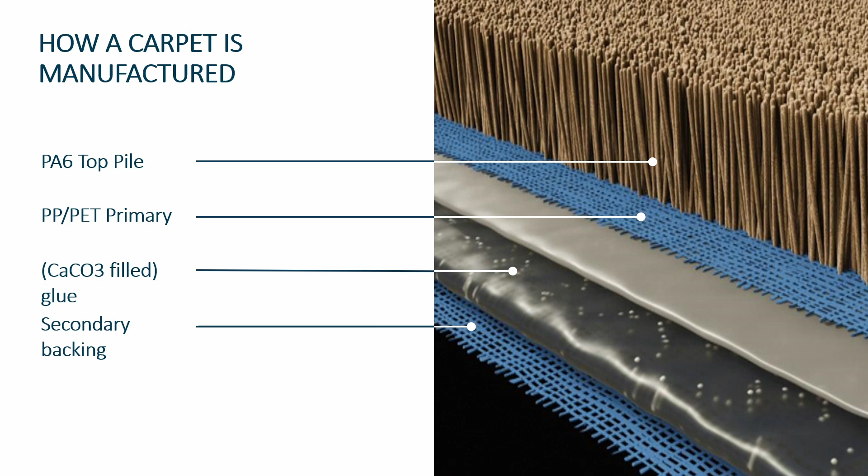The idea is to work with our customers, the tier 1s of the automotive industry, in order to have a carpet where you have the face pile, which is Econyl, obviously, and the secondary backing in a polyolefin that can then be mechanically recycled, like polypropylene or polyethylene.

The result is that we processed these types of mats together in collaboration with some tier ones, and we succeeded in separating the nylon 6 face pile from the polyolefin backing and recycling both of them into a new product. The nylon 6 directly in our Econyl plant to have a recycled nylon 6 fiber, and the polypropylene, for example, mechanically recycled, having two products that can be reused to make the same product again.

So why was the tier one really interested in such a product or in such a process? Because it offers a real closed-loop solution. The mats were returned to us. We were able to separate the nylon 6 from the rest and recycle the same nylon 6 chemically, the polypropylene mechanically, to have polymers that can be reused to do the same, so yarn to yarn, fiber to fiber, again.

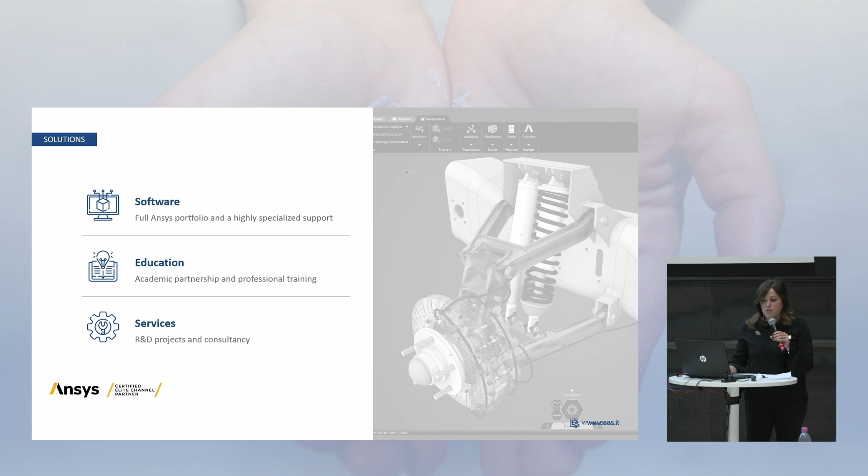We sell software, we sell training and education, and we sell services. The tool that we sell and the main product for our business is the ANSYS platform, which is one of the most important worldwide. And the ANSYS platform has inside structures, fluids, electromagnetics, semiconductors, embedded software, and optical tools.

Over time, we have seen an increasingly dedicated and rigid path in terms of regulations. Only some important topics in this path: the Kyoto Protocol, the European Green Deal, and the International Energy Agency released a roadmap in 2021, and we have the objective to reach net zero emission by 2050. It's a very ambitious target, but now we are discussing plastic transition also because we have a target like this. Let's focus on industries.

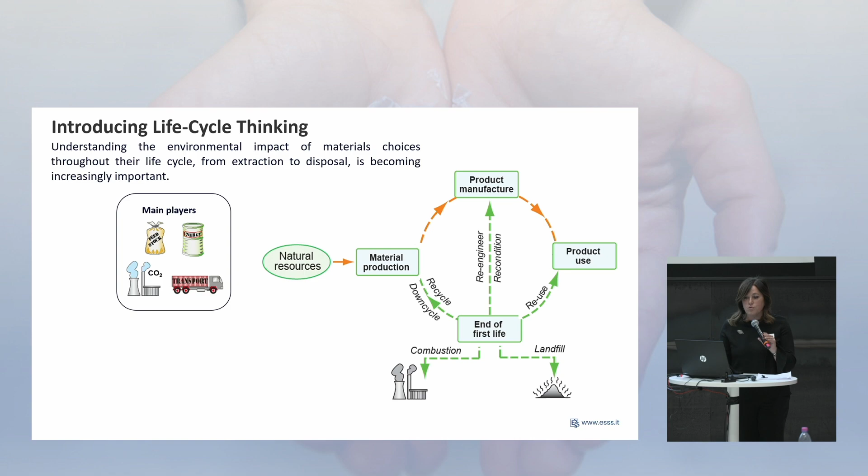The sustainability decision has a direct impact on business. We have to reduce time to market, to increase quality, to reduce cost, and it's always important to improve the brand awareness. We have to consider the whole life of the product, from the extraction of material to the end use phase, and also the recycling or recovery phase. Sustainability decisions in early product development create material impact on production and use. Already, someone before me has discussed the life cycle thinking and the circular economy. So now we have to discuss the circular thinking in the production phase, starting from the design and the concept phase.

Choosing the right material is business critical. We have to control cost. In which way can I perform reliable simulation? What's the equivalent grade for manufacturing elsewhere? In which way can I find the materials that allow me to spend the lower cost? Then we have to increase and to boost the revenue. Can I innovate with new material? How can I lightweight my product? And also we have to mitigate the risk. The regulations regarding restricted substances are very, very rigid, and we have to respect them.

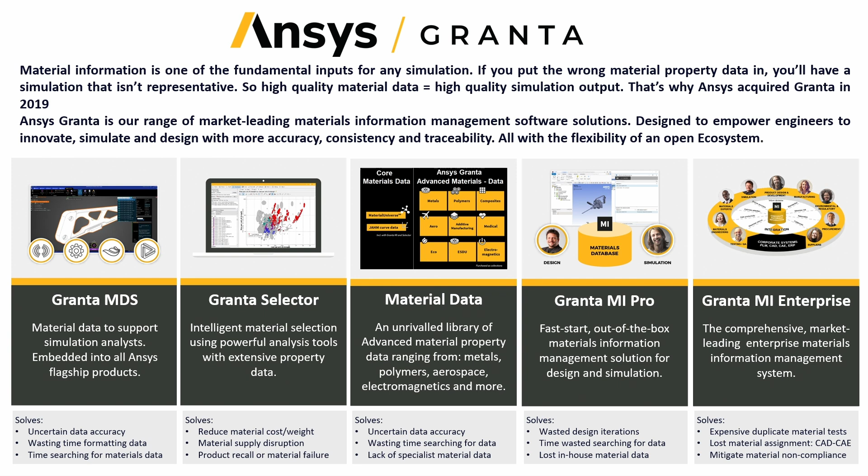In the ANSYS platform, there is a specific tool dedicated to materials that can help us in the plastic transition and in the material challenges. Materials information is one of the fundamental inputs for our simulation. If we put the wrong material properties, we don't have correct results in the finite element simulation. ANSYS Granta is the product that ANSYS has acquired from a Cambridge company that was founded by Professor Ashby. For a materials engineer, Professor Ashby is very well known because he was the man who created the Ashby maps. In the following slide, I show you an Ashby map. He was the first to create a graphical form to represent the material properties in an XY space defined with specific properties that the user can select.

So here in this slide, only a few products of the Granta platform. There are many different products from the entry level, that is Granta Materials Data for Simulation, and so on. There is also a PLM that is concentrated on materials management, and it could be integrated with all the commercial PLMs that we can find on the market. These are the whole libraries that Granta offers. So we have a very, very rich database of materials that can be used as the base of our research.

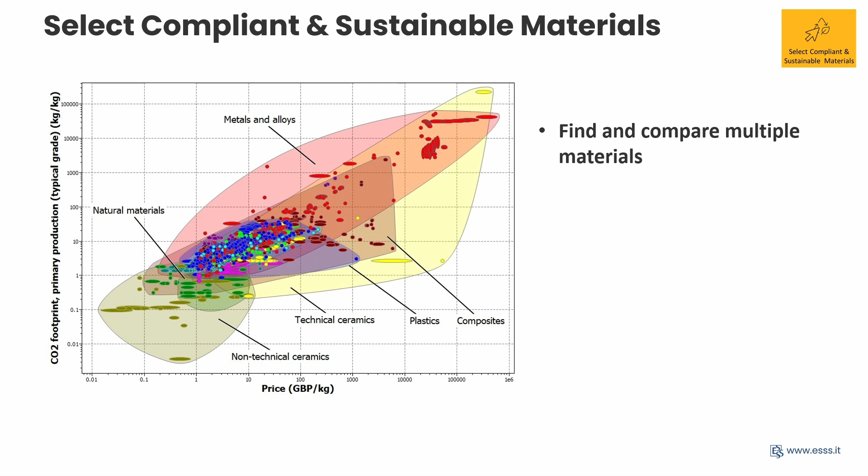This is an Ashby map. So here you can see in which way materials can be plotted in this graph, where we have price on X and CO2 footprint on Y. So we can make a direct comparison among different materials. With the Ashby map, we can create projects in order to find alternative materials to our normal production. So we can put some specific boundary conditions, and we can find in a very easy way alternatives to our normal production material. I can go slow.

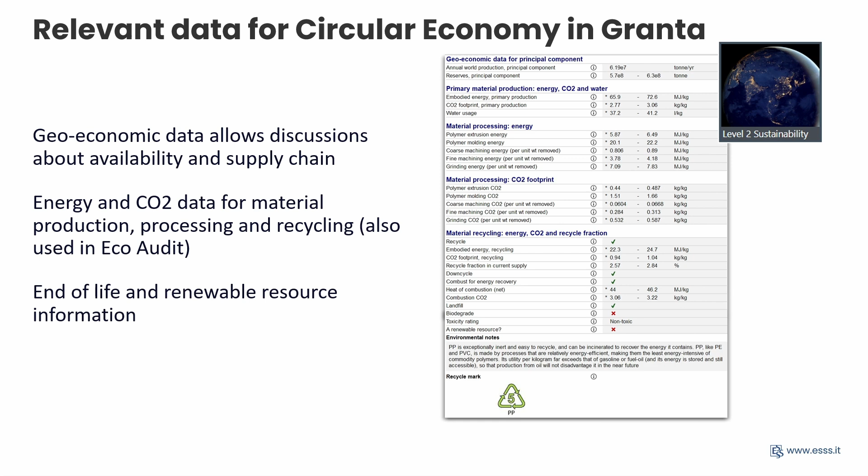In the Granta database, we also find a series of information that is directly connected to sustainability and to compliance with the legislation. You can see some of these in this slide. We also have relevant data for circular economy regarding geoeconomic data that allows us to discuss availability and supply chain, energy and CO2 data for material production, processing and recycling. We can create an LCA with this tool, so we can consider the different phases of the production stage, starting from the extraction of material. And then we have information on the end of life and renewable resources.

We also have the recycle mark that indicates whether the plastic used in the production can be recycled into new product. Inside the recycling logo, we have different numbers from 1 to 7 that are connected to different polymer materials. Another very important thing is that we have to analyze in a critical way all the lines of our bill of materials.

It's not so simple work for the colleagues in the quality office, because they have to know all the regulation and the legislation, and they have to find if there are some lines of the bill of material that are out of this legislation.

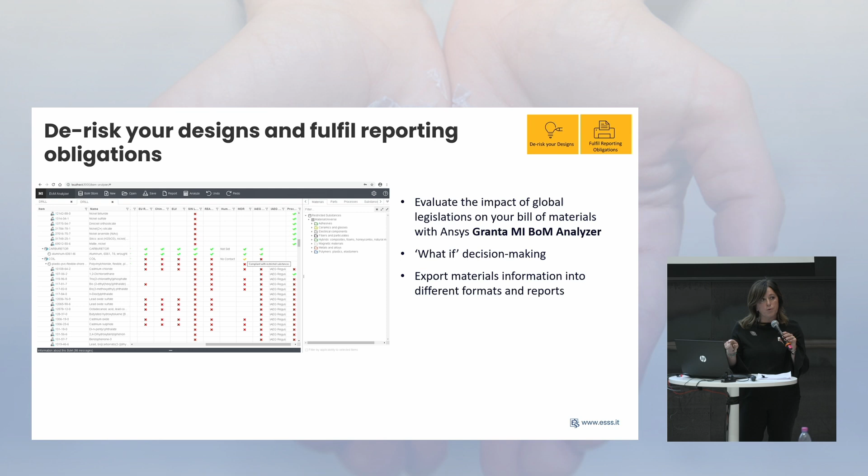If we work with this instrument, we can have a final summary report like this, where we can see a red X if the specific line of the bill of material is out of legislation, or a green flag if it's okay. So we have immediately a photo of the compliance of our product with the different regulations.

Some testimonials - one that is very important, Rolls-Royce, said that the global financial benefit using this type of instrument has been certified at $10,000 for each year in time saved, optimization, and reduced waste, because simulation in general, and material simulation specifically, can help us reduce time and improve our revenue.

This is an example that we made for a company, an Italian company that works in packaging, a very important company. They had to reduce the carbon footprint of material used in packaging for electronic components.

We used the ANSYS Granta tool, only to show you the procedure we can follow. With a specific tool, we create Ashby maps and different boundary conditions. The benefit was to improve time to market, because the designer or engineer can identify candidates for alternative materials very fast, and they reduced carbon footprint within 10% while maintaining mechanical properties sufficient for design. So by putting a specific boundary condition in a very fast way, we can find alternatives using the Ashby maps.

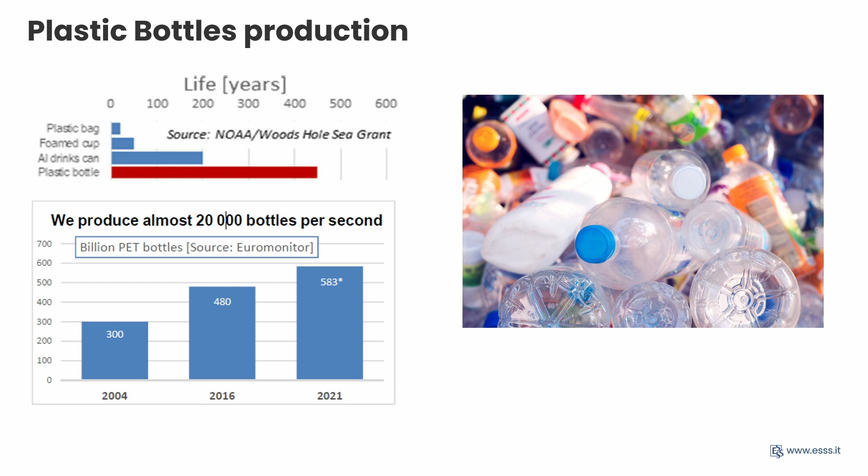Another example, quickly, since Andrea asked me to reduce my time for the presentation. Some data regarding the production of plastic bottles: we produce almost 20,000 bottles per second, and the life of a plastic bottle in the environment is more than 400 years.

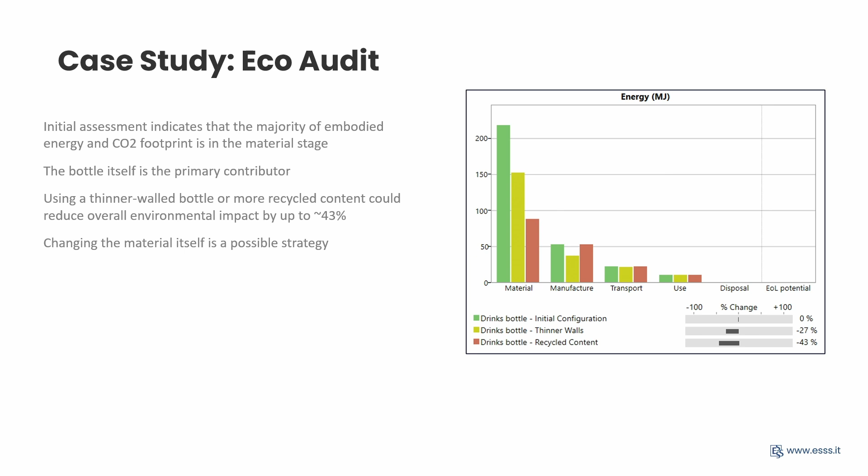Then we went on to create a project to define an alternative to PET, and we found different alternatives. One of the solutions we proposed to the company, which they adopted, was the application of PLA, a biopolymer from lactic acid. Here you can see the results of the LCA.

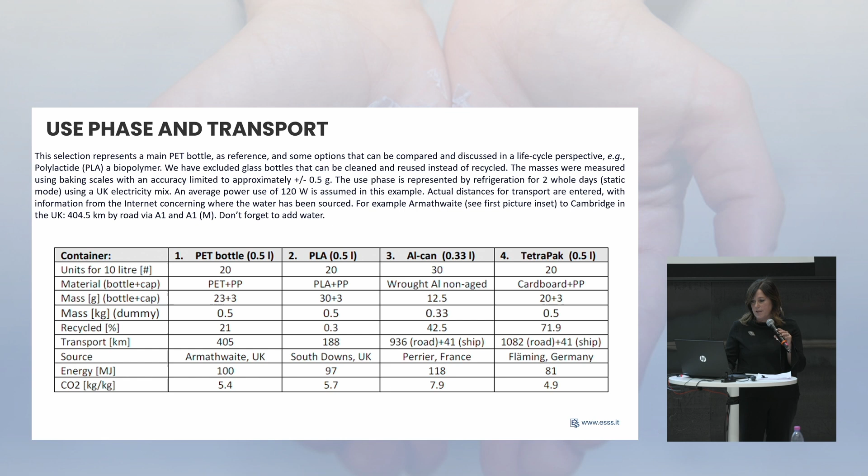Last application: a comparison among PET, PLA, aluminum can, and Tetra Pak. Also in this project, we compared the LCA of these four different applications, and in the last slide you can see the histograms.

You can see that the Tetra Pak option has the lowest value in terms of energy and also in terms of CO2 footprint. So this was only a very short presentation to describe to you in which way simulation and the correct instruments can help us manage the plastic transition. Thanks a lot for your attention.

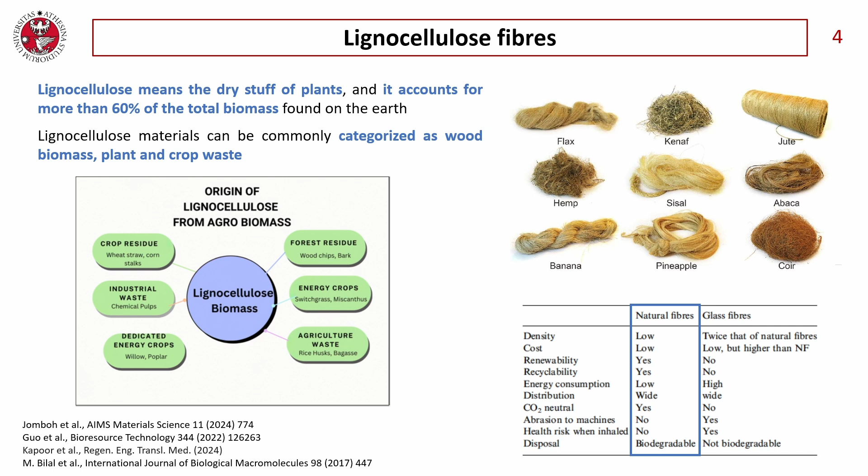We have different methodologies to extract natural fiber, in particular physical and mechanical methods, and retting—which in Italian means macerazione. But after we have produced and extracted this fiber, we have to compatibilize them with the polymer matrices, because the fibers are hydrophilic, and many thermoplastics are hydrophobic. Therefore, there are many thermomechanical treatments, like silanization, according to which we can improve the compatibility between the fiber and the matrix.

A bit of chemistry: what is lignocellulose? What is wood? It is composed of three components. Cellulose, an organic compound and linear polysaccharide, with a very ordered structure and high crystallinity. Then hemicellulose, which has the same chemical structure but is amorphous, with a random structure. And then lignin—a cross-linking phenolic polymer formed by the polymerization of different primary monomers, which are the alcohols of lignin. It has a 3D structure, is very resistant, and protects the structural part of the wood, which is the cellulose.

Different lignocellulosic materials have different percentages of lignin, cellulose, and hemicellulose. In the lignocellulosic fiber with very high cellulose content, you have very high strength and stiffness. So the mechanical properties of these fibers are primarily due to the content of cellulose within this material. But there are other important physical features that we have to take into account.

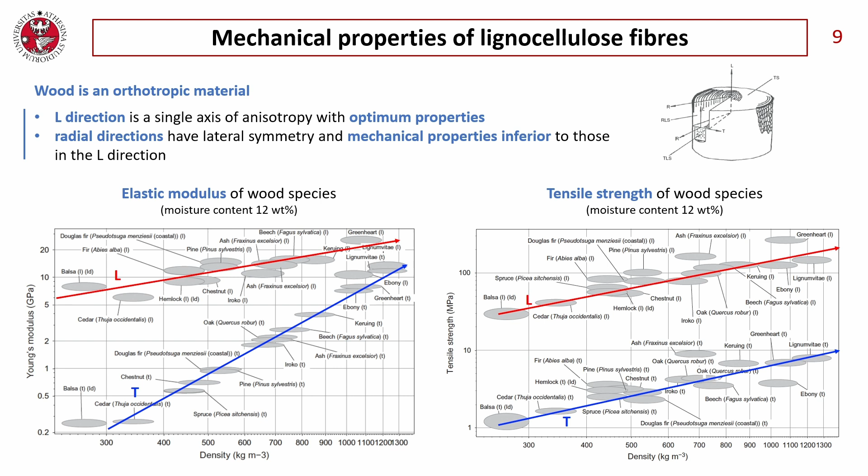The density is important in the sense that the mechanical properties increase linearly with respect to the density of the wood that we consider. More generally, natural fibers are among the stiffest and strongest natural materials that we have at our disposal.

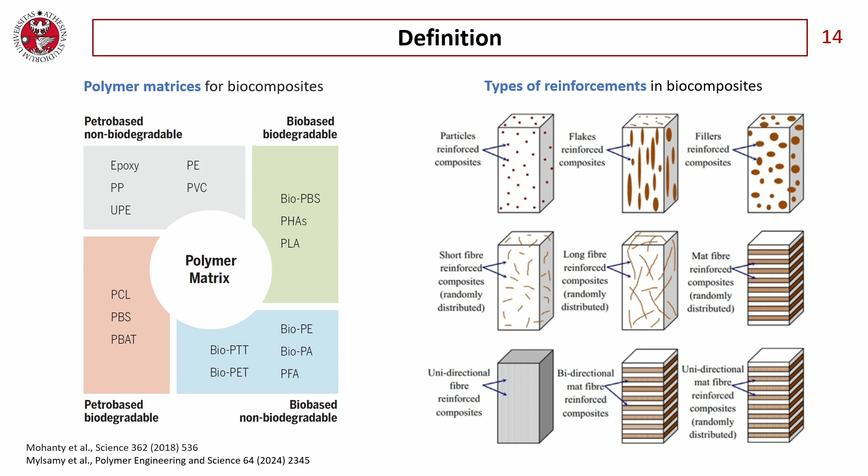The global market of wood polymer composites is formed by polyethylene, 65%, PVC, polypropylene. In the other polymers, we can have some thermosetting resins like epoxy resin or phenolic resins. The reinforcements are in the form of wood fibers made up of hardwood or softwood, or you can use wood particles that could be supplied in different ranges, some hundred micron diameter range.

They are very versatile materials in the sense that we have different processing routes to prepare these kinds of composites. We can use thermoplastic material thanks to extrusion and compounding. We can use the composite pellets to produce injection molded products or extruded profiles. Or we can produce sheets that we can use in compression molding.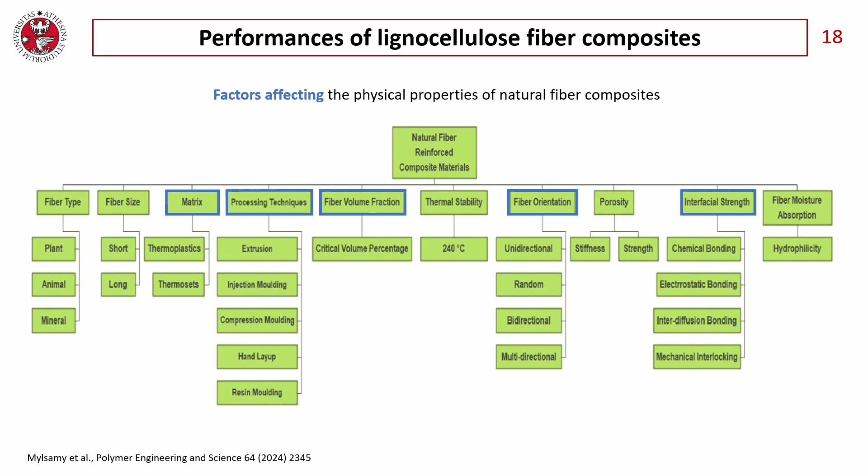Obviously the reinforcement form has a governing effect on the mechanical properties, in the sense that unidirectional composites perform better with respect to bidirectional or non-woven fabric composites. Thermosetting-based materials are generally better than thermoplastics, and these kinds of composites have comparable specific properties with respect to glass fiber reinforced polymer and some metal alloys.

Once again, these kinds of composites cannot compete with carbon fiber reinforced polymers. So the real competitor is glass fiber reinforced polymers.

In this chart, if we compare unidirectional thermosets and unidirectional thermoplastics reinforced with glass fiber and natural fiber, it is immediately clear that when comparing moduli, specific moduli and absolute moduli, we have a good comparison—they have similar stiffness. If we compare instead the tensile strength, glass fiber performs better than natural fiber.

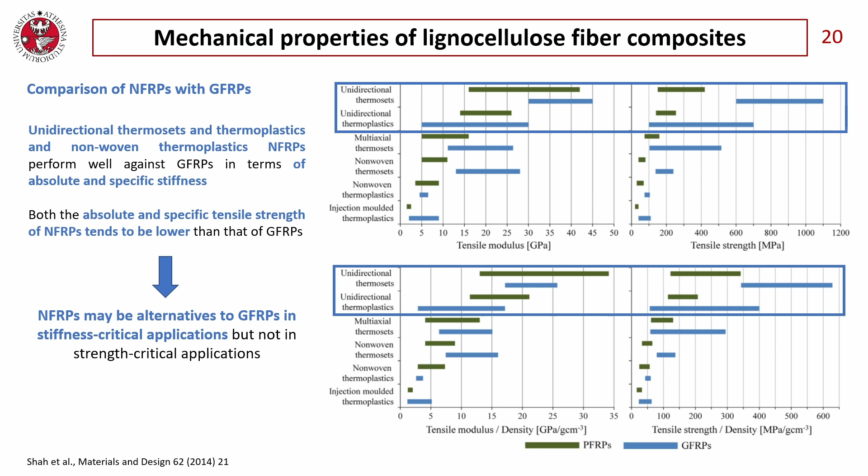So I hope I've convinced you that this material could be a good alternative for many industrial applications. But now it's time to leave the floor to my colleague Giulia Freddi, who will explain and show you the challenges and industrial opportunities for this material.

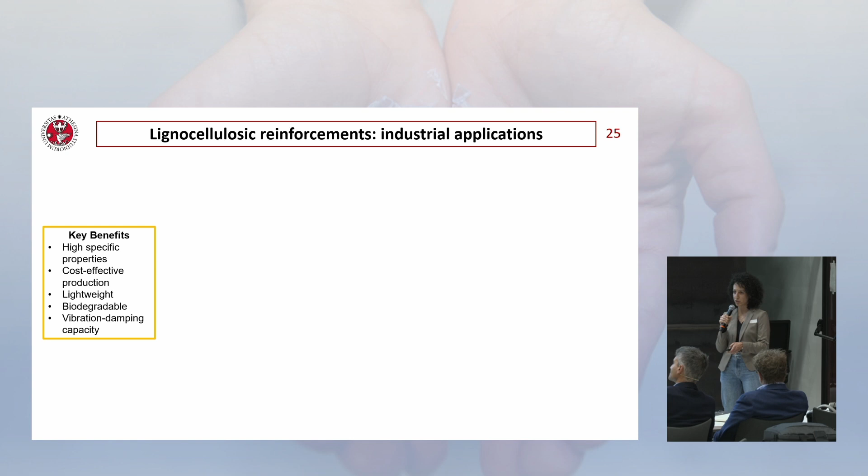So the benefits again are these: cost-effective, high specific properties, lightweight, biodegradable—which is both a pro and a con—and vibration damping capacity.

Therefore, they are already being used for several types of applications in the automotive industry, in the construction and building industry, but also in consumer goods, sports goods, and other types of transportation.

My presentation will focus quickly, especially on the challenges, and what we can do to tackle these challenges. To summarize all the challenges that natural lignocellulosic fibers bring, I think they can be divided into three main groups. The first challenge is the poor interface with the polymer matrices.

In fact, they are hygroscopic and hydrophilic, and therefore have a poor interfacial interaction with polymer matrices, which are mostly more hydrophobic. But they also absorb water, and this causes swelling of the natural fibers, which further degrades the interface.

The second challenge is the poor stability in general of these fibers—they have poorer thermal and environmental stability than other types of fibers like glass, and this has two main consequences.

So they degrade during processing above 200 degrees, more or less. And this is challenging, especially if you want to combine them with technical thermoplastics, like polyamides, polyamide 6 or polyamide 6,6. It is not a challenge if you want to combine them with polypropylene, of course.

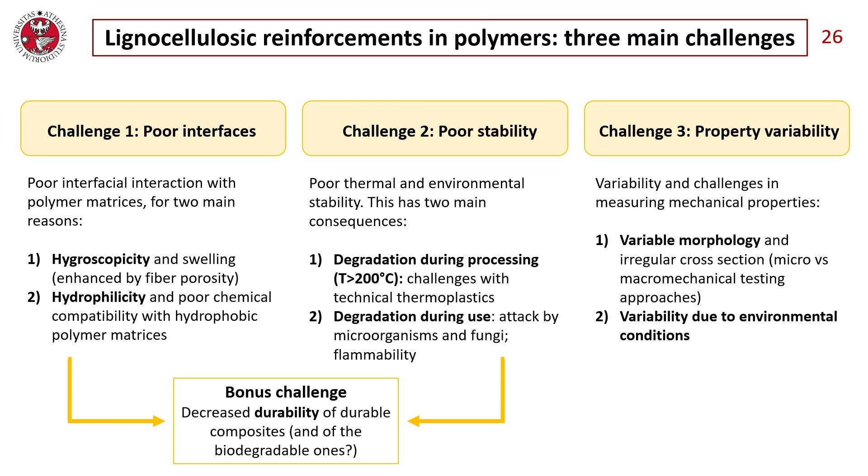Bonus challenge: the first two challenges actually showed a decreased durability of durable composites, and maybe also for those composites which are intended to be biodegradable. Okay, starting back from the first challenge, the hygroscopicity of the fibers, the fact that they absorb a lot of water causes a stress on the interface.

In fact, you can see that if the fiber absorbs water, it can swell, and some water-soluble substances can leach from the fibers, and therefore the fibers will shrink when the environment is dry again. And this, of course, decreases the interfacial strength with the polymer matrix. This occurs both with hygroscopic matrices like polyamides, but also with non-hygroscopic matrices, because all the matrices present porosity.

Moreover, the single cells, the single fibers can swell due to their hygroscopic nature, and this, again, will be an anisotropic property. They will swell differently in the axial and in the radial direction, and this will cause a further deterioration of the interface.

What can we do? We can tackle this hydrophilicity and this hygroscopicity by surface treatments. The aim is to remove the hydrophilic hydroxyl groups from the fibers and to replace them with something else. For example, we can have chemical methods like mercerization, silane coupling, esterification, acetylation, etc. Or we can have physical treatments like plasma, ozone, corona treatment, etc.

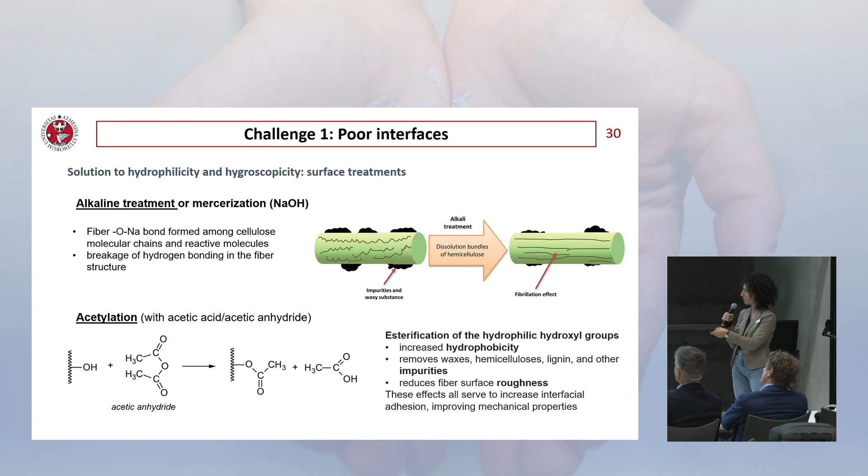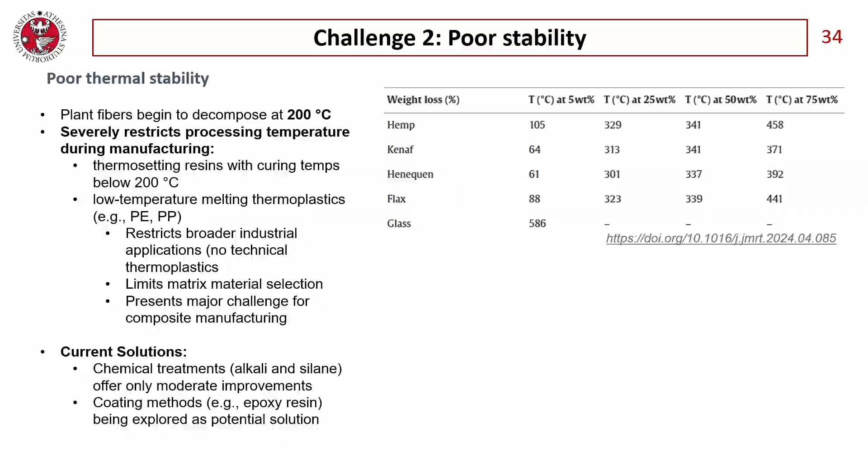Okay, moving on, the second challenge is instead the poor thermal stability. Again, 200 degrees is set as the maximum temperature at which we can process the natural fibers. This, of course, is a problem with engineering thermoplastics, because it's not a problem with thermosetting resins and low melting temperature thermoplastics.

But these 200 degrees maximum, or 230, 250 degrees maximum, limits strongly the processability with engineering thermoplastics. The current solutions involve chemical treatments, which offer only moderate improvements, or also coatings, like with epoxy resins, are being explored as possible solutions.

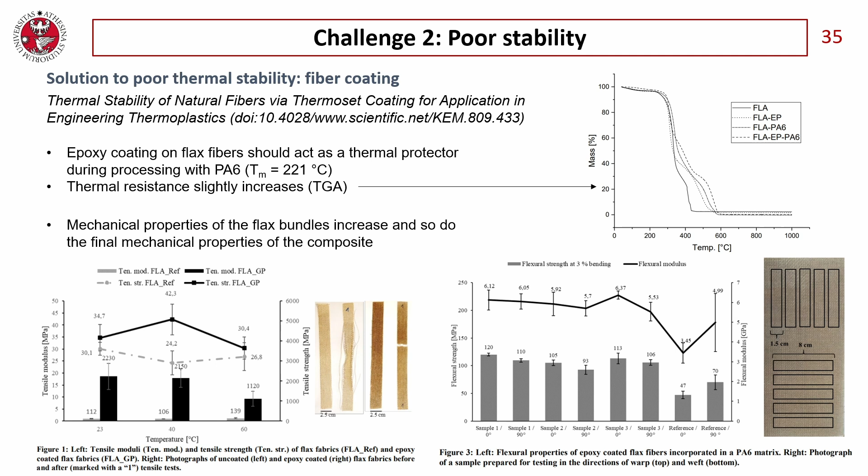But in my opinion, for example, these authors present an epoxy coating on flax fibers, and the increase in thermal resistance is only moderate. Still, this coating brings a considerable improvement in the tensile strength of both the fibers and the final composite. So it could be a solution.

Okay, another solution could be changing completely the processing of thermoplastics. If we substitute the traditional thermoplastic processing with a reactive processing, we end up working at a lower temperature, and this could be a solution not to overcome the famous 200 degrees Celsius. This can be done not with all the thermoplastics, but only, for example, with polyamide 6.

Now, you can start by the monomer, by the low molecular weight and low viscosity precursors, and you can inject the monomer directly in the mold containing the fibers already, and in the presence of some initiators and some catalysts, and in total absence of water and moisture, otherwise this will not work, you can end up with a PA6 matrix composite reinforced with your natural fibers.

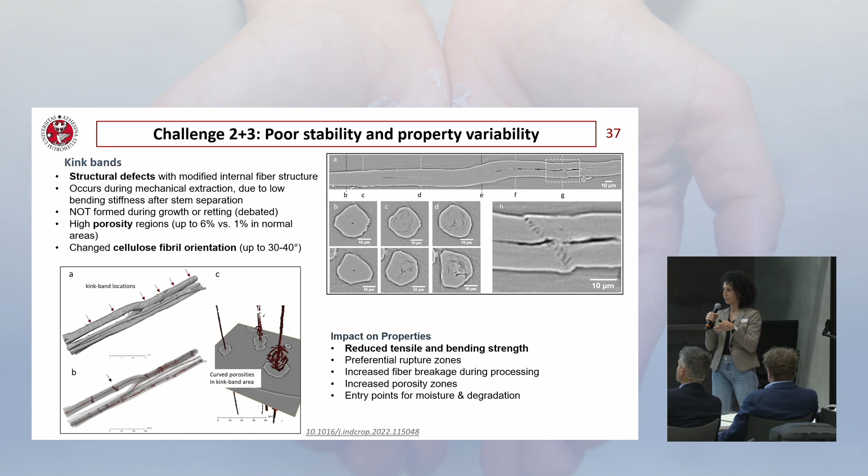Besides the poor stability combined with the property variability, what is observed here in the slide is that the lignocellulosic fibers also have the so-called kink bands. The kink bands are these folds over here in which you have an increased porosity, and they, of course, massively decrease the tensile strength of the fibers and also the tensile strength of the final composite.

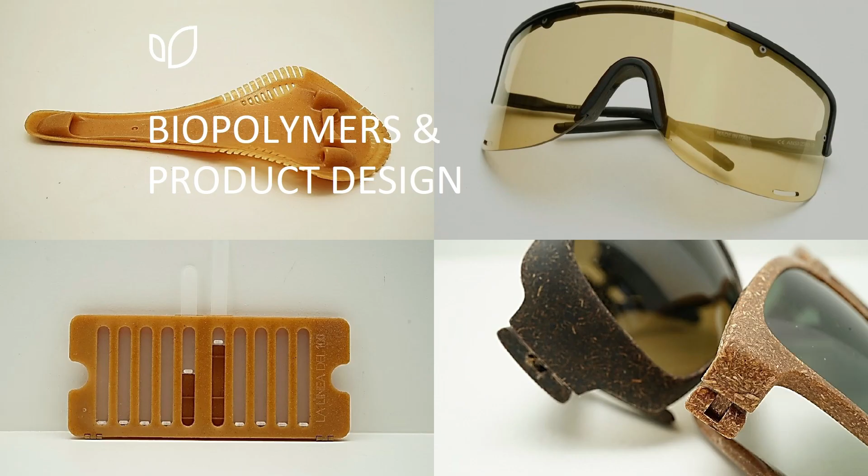One of the most important aspects for product design is the aesthetical approach, of course. The aesthetical approach means the appearance of the material. And as we saw in the last year, one of the most important aspects is the color and the finishing. Of course, we are talking about technical performance, strength, mechanical performance, and so on. But for product design, not only that is important, because the appearance, the perceptive quality of the product are part of the aesthetical approach.

We saw that two colors are very important and very trendy in the last years, yellow and green. Yellow and green in different nuances, in different gradations, but they are very important because they communicate that we are talking about a special material. We are talking about a biopolymer. And last but not least, the finishing. The finishing has to be very soft, with soft colors, with this texture in a very soft way. This is a very important approach for the biopolymer.

Today, I would like to talk about 4 different keywords relating with materials, relating with products, and relating, of course, with design. The first one is the advanced polymers. This is the next generation of PLA. We have heard a lot about all these materials. I won't go now into the technical specification. But for us, it's important to understand in which way we can use this kind of material.

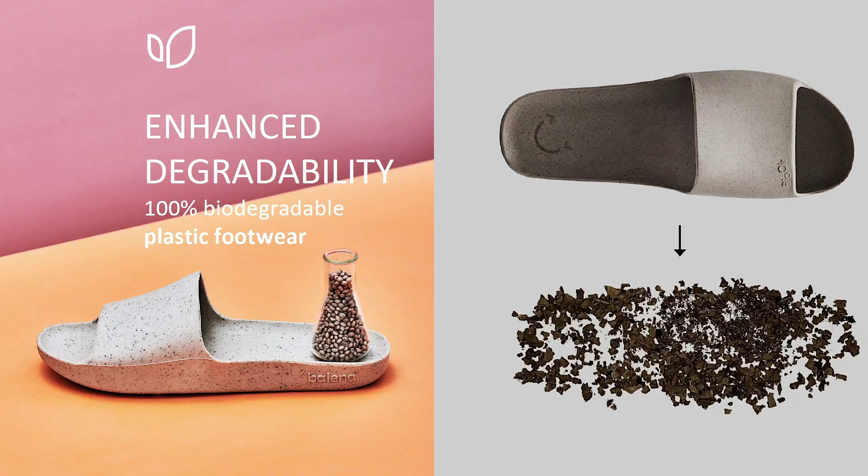Another interesting product is BioCir Flex. The name of this sandal is Balena, and this is very interesting because it's a fully compostable thermoplastic elastomer, replacing toxic fossil fuel-based materials in consumer goods. It's interesting because you can use the granulate for injection molding or extrusion. So this is another very interesting possibility to use this kind of material.

So just an overview of the possibilities today with biopolymers, with a new aesthetic approach, with a new vision of the future, because sometimes people think that sustainability is not really attractive. No, we try to maintain this aesthetic approach. We try to transform, maybe, a new aesthetic to give the products a very good appeal.

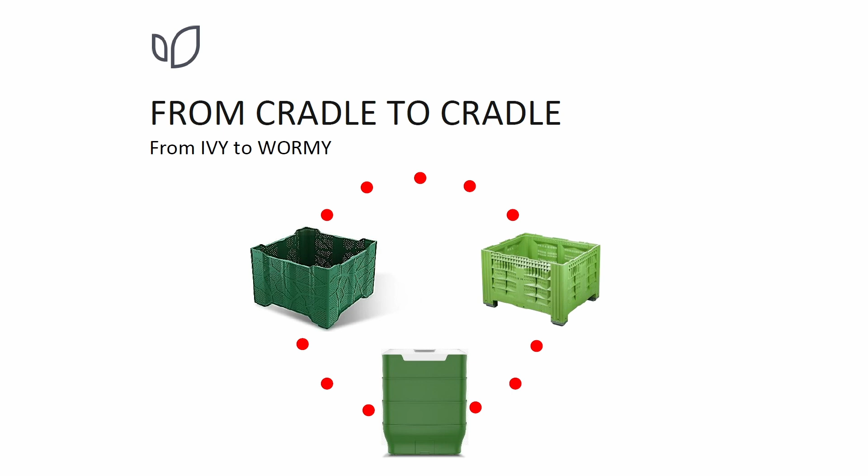This is a compostable litter bin for the home, because we observed that a new behavior at home is to use compostable elements. After the pandemic, our behavior changed, and our idea was to transform the typical compostable element into a worm station, because thanks to the worms, it's possible to transform biological waste into a special soil, which is a fertilizer.

As you can see here, different uses, different situations. This compostable element is modular, and it's possible to use it in different situations, for a single person or for a family. It was my last slide, and I hope it was informative for you today.